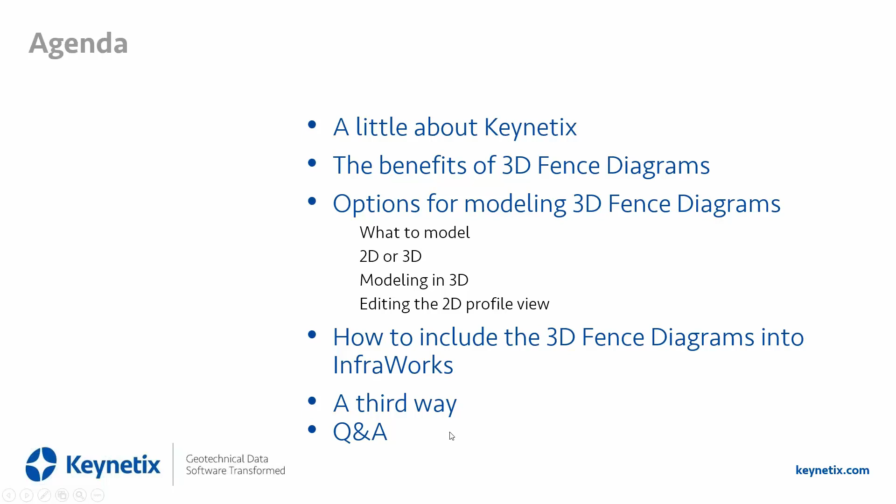We're going to look at ways to do it in 2D, in 3D, how we can then bring them into InfraWorks. We're going to have a quick look at a third way. This is one of those futures disclaimer items, but this is what Keynetix is working on. And we'll obviously, as we go through this, answer any questions that you may have.

So Keynetix, I'll go through this very quickly as Dave's done it all before, but primarily we develop software for geotechnical data management. So if you need to generate a borehole log, generate a cross-section, a fence diagram, that's what we develop our software for, and it works very closely with AutoCAD Civil. We work very closely with Autodesk, so we have lots of experience in this area. So without any more of that, let's just move straight on now.

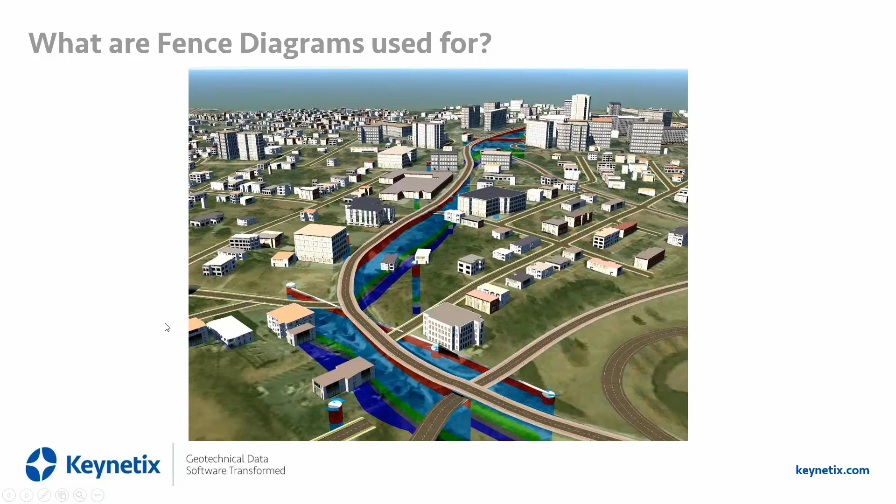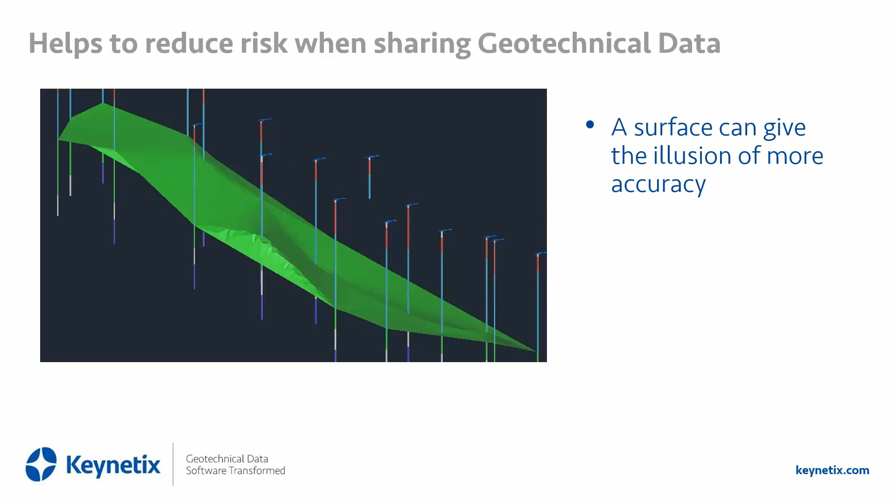Well, if you share a nice shiny geology surface like we've got on screen here, it's nice and shiny, computer generated, it must be right. But in reality, that's not the way geotechnical professionals work. What they will do is they'll create a whole series of cross-sections across the site, and they will study these cross-sections looking at what geology is going on in 2D.

So if you've got a point on the surface that is a long way away from where they studied, though we may have a very smooth, very accurate looking civil surface being generated, in reality, this point here may be nothing at all like what you're seeing here. So you may be able to measure it down to 0.0001 of an inch, but actually it could be out by meters or feet. That geology may not even be there. These cross-sections will be what the geotechnical professional is looking at and studying. So by sharing these cross-sections, they are more confident of reducing the risk.

Now, of course, if it's important, you need to know what's going on at this particular point here, then you need to ask your geotech to create a cross-section and study what's going on in that particular place. So these are some of the benefits of sharing these cross-sections, as well as being visually a lot more user-friendly and easy to understand.

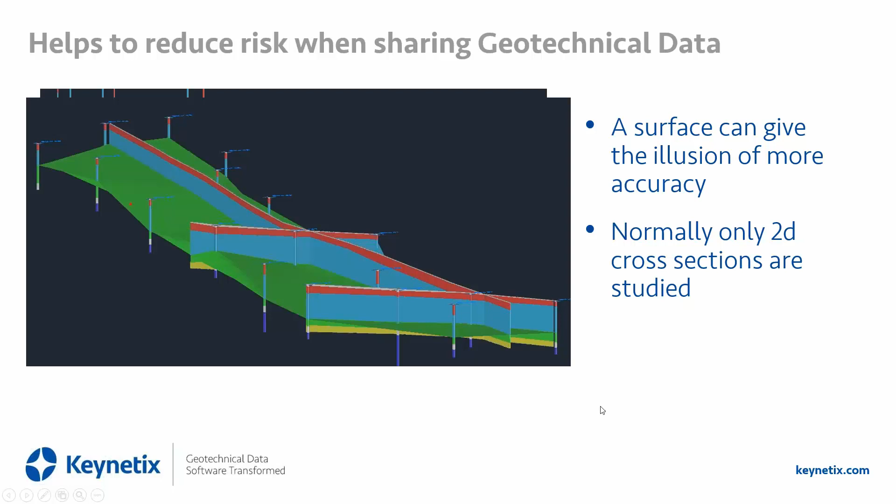Now, we're going to go in and start looking at the various options for modeling these fence diagrams. But before I do so, I'm not sure at the moment how many people are using the geotechnical module, but when you start receiving or generating geotechnical data, there's quite often a lot of different terms used. So for instance, in the geotechnical module, you can tell it to model using geology codes, legend codes, geology code 2. If you're working in the US, you may want to use soil classification codes, lithology, geology formation, lots of different terms. But actually, what data do you need to actually model on?

Well, actually, it splits into really two camps. Things that describe the lithology or the formations. These are basically describing the physical appearance of the material that you're looking at. So in the UK, we generally call these legend codes. In the US, it could be your Unified Soil Classification System. And it's basically looking at the breakdown, the percentage of how big the particles are. Is it sand? Is it gravel? What's the makeup and percentages of it? It's really describing what the drillers and engineers on site have found as they dug the ground out.

That information, though, is normally interpreted to look at the actual engineering characteristics of that soil, what's common, and given a geology code, as we call it in the UK. In the US, we found some organizations call it the engineering soil unit, and it's basically common types of characteristics or properties with a mass of soil combined together.

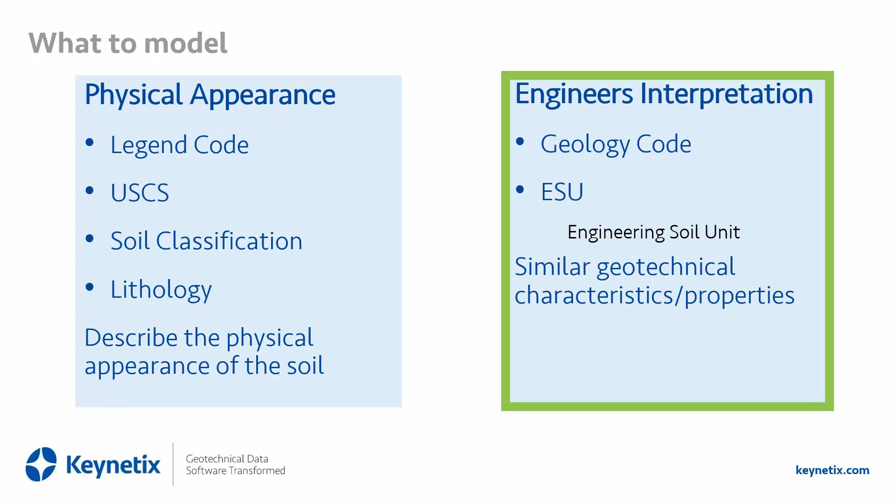Now the reason I'm saying this and emphasizing it is if we actually go and look at two typical log strips, the one on the left is based on physical appearance, in this case it's the soil classification, while the one on the right is based on the engineer's interpretation. If you see, as we go down this hole, we've got some clay. We then got clay with some silt in it. We're then back to clay again, then gravel, then some more gravel underneath that.

But actually, in reality, for engineering purposes, we don't need all this complexity. And all this extra complexity is incredibly hard to model. So the engineer will look at that and they'll actually say, well, let's combine all this information into one big formation called clay. Let's call it gravel. Now the person who looks at this needs to have the engineering professional experience to look at this data and work out how does it combine.

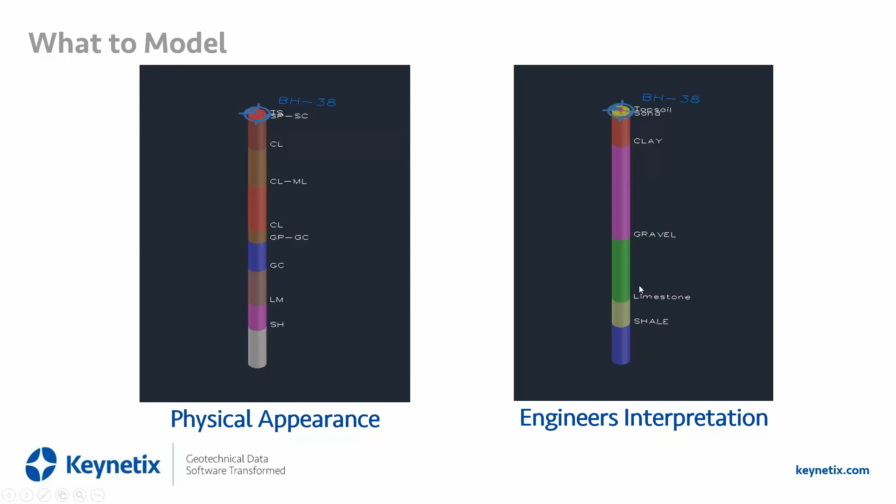They'll be doing this also with lab results coming in, moisture contents, a whole host of other information while they interpret this data and look at it. But the reason I'm saying is that this is the information we ought to be modeled on, and that's the information you need to be getting or generating yourself to work with inside the geotechnical module.

This then leads me to my next question, which if Eric can just show it, which is basically asking you who does your engineering unit interpretation. So basically, do you, when you receive the data, you or your team actually look at it and work out the interpretation, how it's going to be used? Is that information just passed through to you?

At the moment, and I've seen it quite often with some customers, they don't actually model at all on any of the geology. They just use the actual lithology codes in cross sections and that's it and nothing else. And of course, if you're unsure, then just put I don't know. I'll leave it open for just a few more seconds. We've got about 70% voted. And let's go ahead and close it there. And I'll share the results so everyone can see them.

Okay, that's good. So looking at it, 35% of the team do it themselves, 31% have it supplied, and the others either don't know or we don't model. Actually, I'm pleased to hear that. So that means, good 65, 2/3 of you are actually aware that you need to be working with geotechnical data and you're pulling that geotechnical information in to work with. That's good to know. Right, let's move on to the next one.

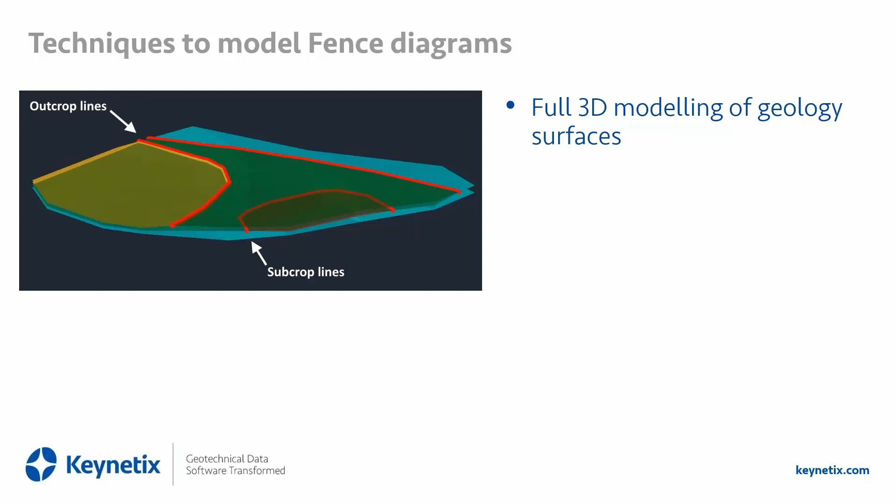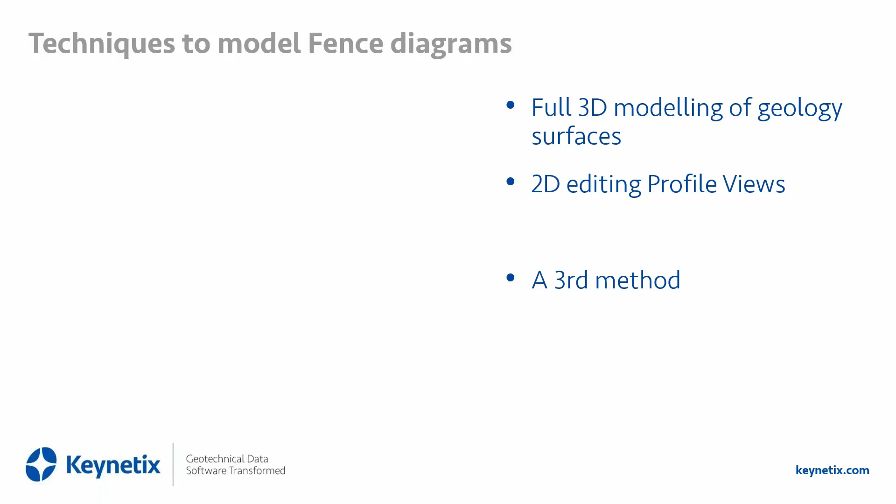So where were we? So what we're going to do now is, thanks to that information, let's start looking at the techniques now to actually model these fence diagrams. So the first one we're going to look at is actually the full 3D modeling. So this is actually crafting, sculpting your surfaces to represent the geology. We're then going to go and look at, well, how can we create them by just doing simple 2D edits in the profile view. There is actually a third way, which we hopefully get time at the end to cover, or potentially a third way for the future we want to show you.

So before we start doing that, let's start looking at the pros and cons of whether we want to model in full 3D or whether we're going to use just 2D edits. So if we look at the pros for the full 3D modeling, it gives the engineers, the geotechs who are pulling the data in, potentially a better understanding of the subsurface. They have to look at it all around in different ways and understand how to actually manipulate their data. Once you have actually done the modeling, it then generates dynamic profile views.

You make full use of the functionality in Civil, put a new alignment in, create a new profile. You've got the geology already modeled, it pulls it up, it makes it very quick. And of course, you've got a 3D model, then you can start generating volumes from it. You can use it for many other purposes. However,

workflows are complex. I'm not sure whether actually the workflow itself is complex, but actually learning how to apply it can be quite complex. I guess it's a bit like learning to paint. Painting is quite easy, but actually learning how to paint and put the brush strokes in the right place takes a bit of skill and time to actually learn how to do it.

And I guess it's the same thing with what you're going to be seeing here with doing the 3D modeling. You may need more data. If you had only a site with one borehole on, you can be as creative as you like in doing the modeling around that one borehole, but it actually isn't going to be any reflection, or it's going to be incredibly lucky if you actually get it to reflect what's going on there, because you only got one piece of information. So you may need more boreholes, you may need more thorough data to actually do a more accurate model with it.

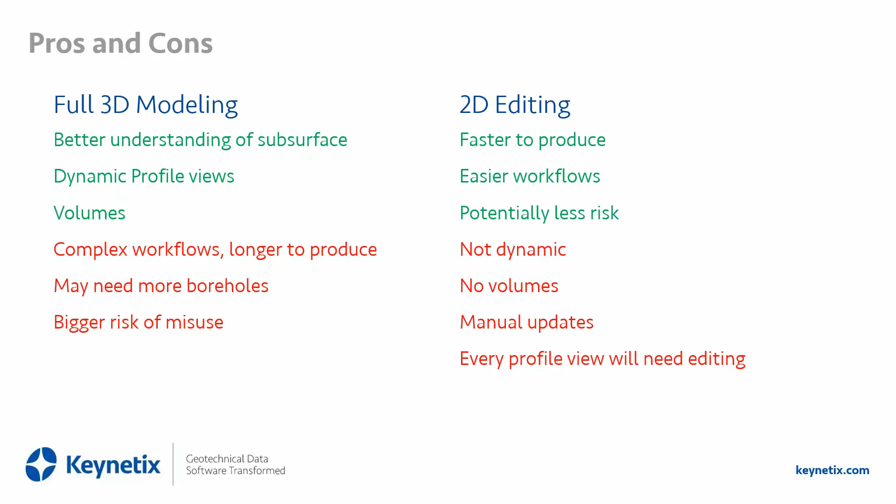So yeah, there's pros and cons with the two. In reality, I think generating full 3D models is the better approach, but it takes longer. 2D quite often is the quick answer to solve the problem. So let's go in and start looking at the steps involved in doing this 3D modeling.

It's actually relatively straightforward. You draw a polyline in plan where you think the extent of a particular geology type is. You convert it into a feature line and you make sure you then assign it an appropriate elevation so the Z values are correct. We then add that feature line as a break line to the appropriate surfaces, and if we need to, we can also add hide and show boundaries to show where that geology occurs across the site. It's pretty straightforward. In fact, this first stage, 2 stages, this is the way I tend to like doing it. If you are a dab hand at drawing 3D feature lines directly in the right place, use any technique you want to draw those feature lines. I tend to use this technique myself.

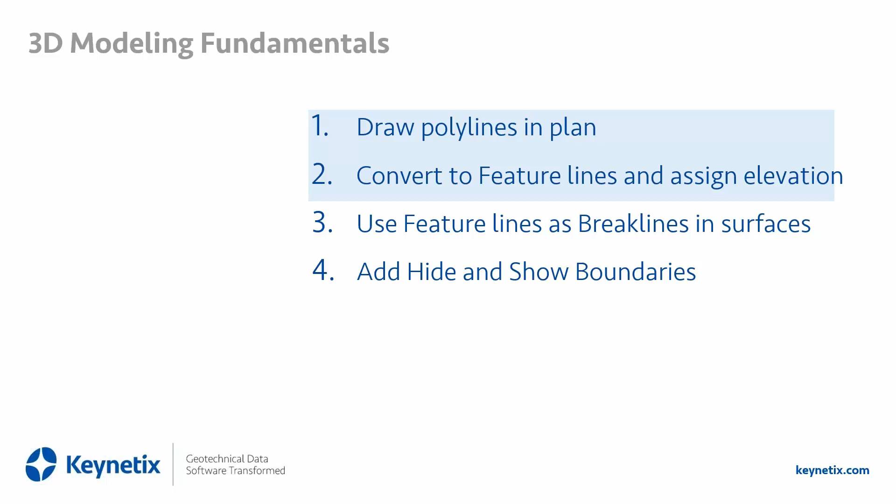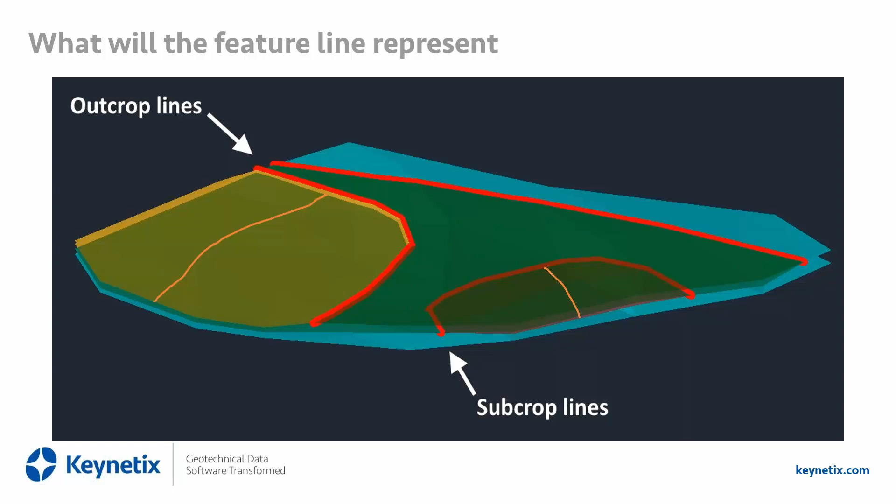So what do these feature lines actually represent? So here we've got a little example of some different strata, and we've got this material coming up over here, let's call it clay, and it stops here. So what we can do is draw a feature line where we think the extent of this particular clay is. So as it comes over, across the whole site, you can see coming across is the green, and we think this is the extent. So we're drawing a feature line that is going to be in the right XY and in the right Z value across the site. Now, generally speaking, they don't have to be at the extent of the geology. You could actually draw the feature line wherever you want to, if you want to sculpt and manipulate your geology surfaces into another position. And these are basically the techniques that we use everywhere.

When you're doing this, it is important you understand the order of your strata. What's going on in the area I'm looking at? Is it sand, clay, gravel? Is it gravel, sand, clay? Is it some other material? Understanding your geology makeup, the order that you're looking at in your particular area, understanding this information is really important when you're doing this. And you'll see that as we go further through this presentation.

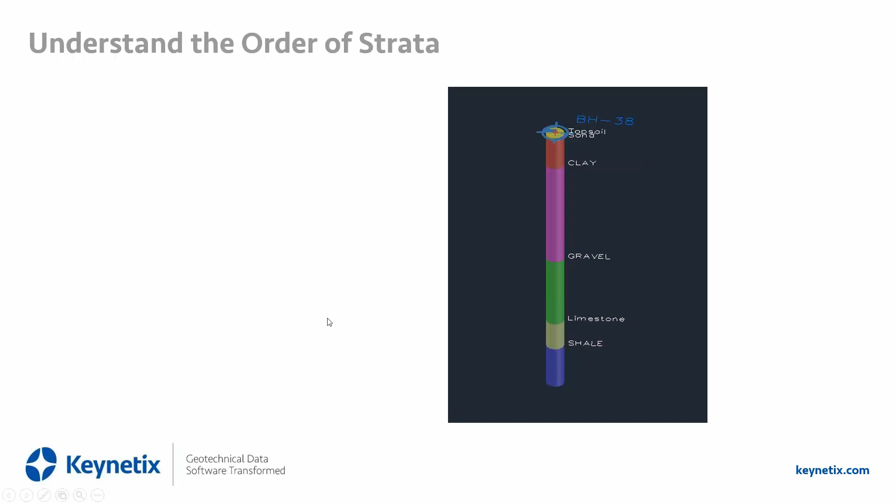There's a few do's and don'ts. So feature lines should not cross different geologies. So here, for instance, the red geology up here, which is our clay. Now, most of the people on this are seasoned Civil 3D users.

So if we create one continuous feature line all the way down here, then add it as a break line to this surface, we know that this surface is going to suddenly extend all the way across here. Well, we don't want that to happen. So what we need to do is to draw individual feature lines that have a similar common geology above and below. Once one of those geologies changes, you need to start to create another feature line.

Also, don't overhang it. Well, you can overhang it. If you do, though, you just need to make sure you move the Z value at the end of it to the right Z value. Otherwise, you'll suddenly have a great big cliff at the end of your site where your geology just disappears down to the middle of nowhere. So it's always best to snap and make sure you don't have overhangs. But these feature lines should only be drawn for when you've got common geologies above and below. As soon as one of those changes, start a new feature line.

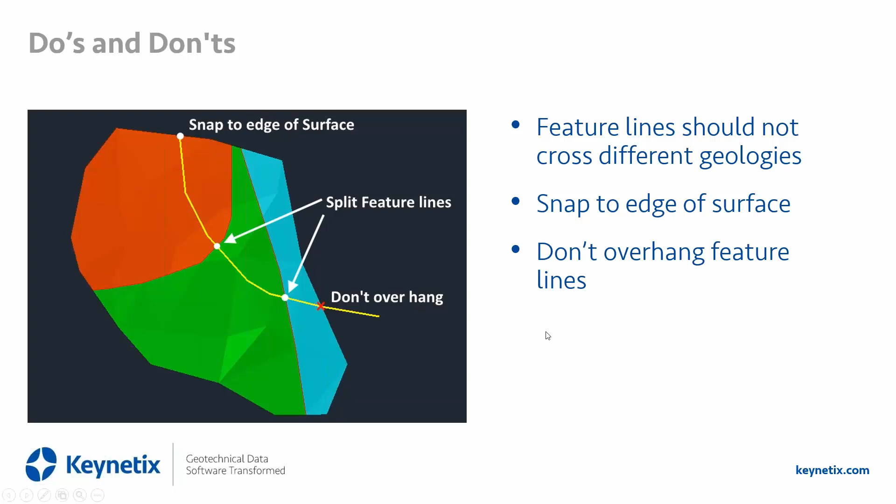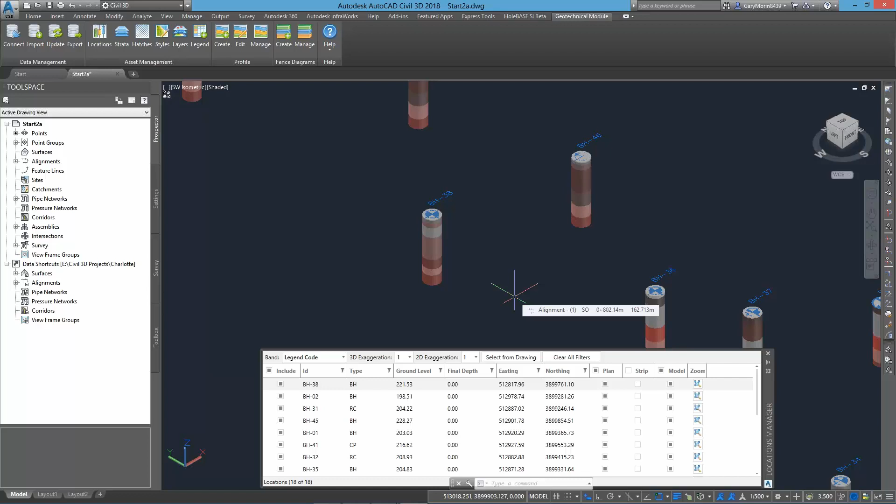You could try modeling it on this data, but it's going to be a magnitude more difficult because there's a lot more variation in there. So generally speaking, you want to show the geology codes. In your log strips, when you generate your profile views later on, you may well want to show your legends or soil classifications, but the actual modeling should be done on the interpreted engineer's data instead.

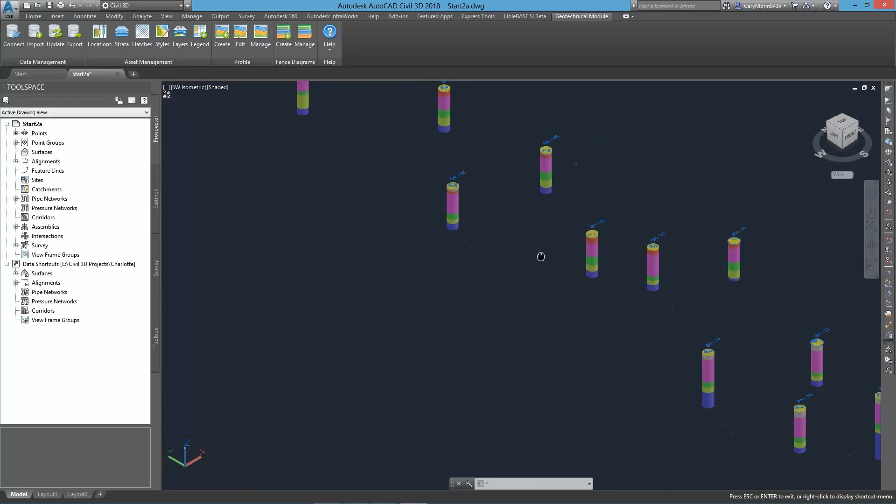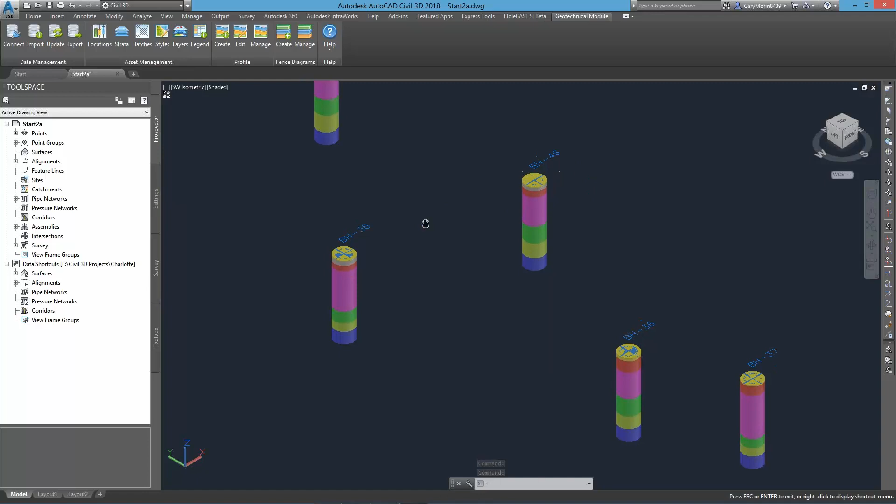So now we've done that, let's have a quick look and try to find out what's going on across our site. You can see down this bottom end of my site, all these boreholes have this white towards the top. This is my peat, and it comes along and it stops here. But then we have a whole series of red, where our sand starts. Sand again, here we've got peat and sand. Now our peat's gone completely.

One other thing I've noticed here is we've got the green, which in this case is gravel on these 5 boreholes. They go all the way down the site, but they're not at the top end of the site. So it's looking at the data, trying to understand what's going on across the site. And this is where I should be using as much material as I possibly can: maps, background, photographs, a whole host of different information to give me the best picture of what could be going on here.

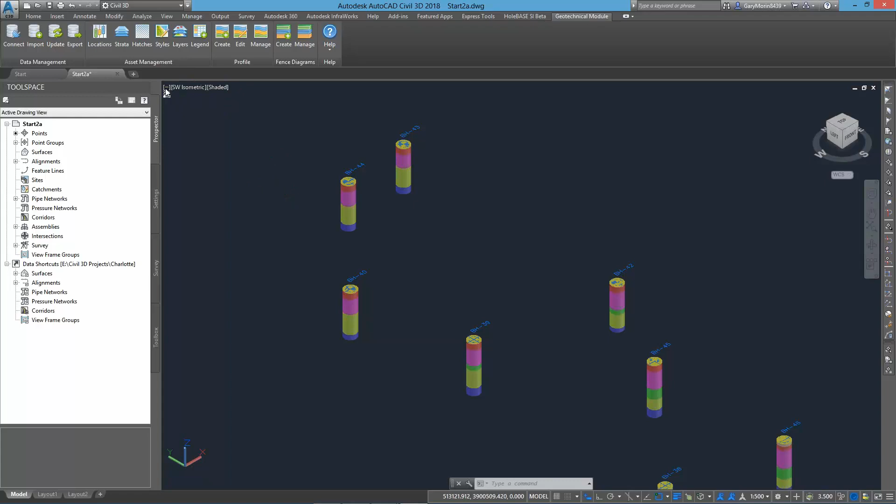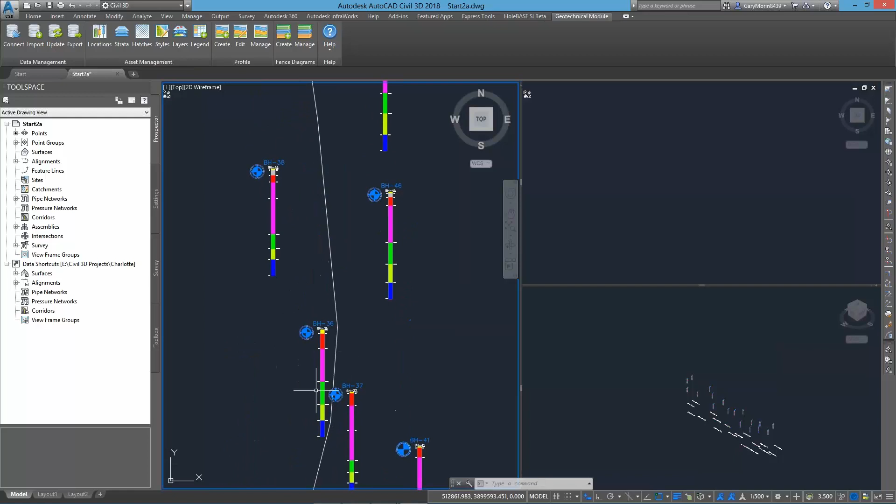Another way to see this information is for us to go over to plan. If I go to the location manager, I can also tell it to show log strips on plan. In fact, let me just make these slightly bigger. Let's bring them up to 2 times the size. There we go. And again, you can see here, there's my boreholes with peat in. The peat disappears. Peat, we are going up here again. So you've got this information to give us a good idea of what's going on.

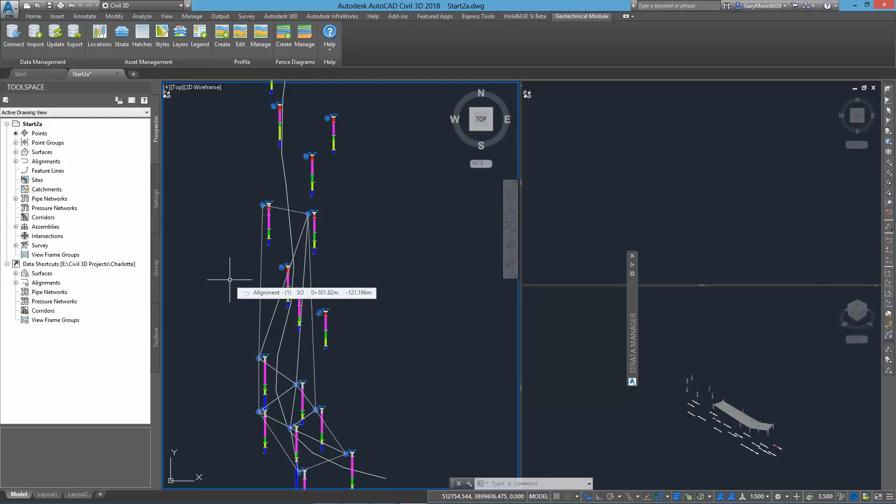So let's start bringing in the geology surfaces. In fact, I'm going to bring in the peat first of all, just to quickly show you some of the stuff we're going to have to do if we just left it like this. Can you see it's joined all the dots together where we have peat all the way up to here, and our surface continues right through these boreholes where we don't have any peat. So that's what we're going to have to create and model and make it look right in a little bit.

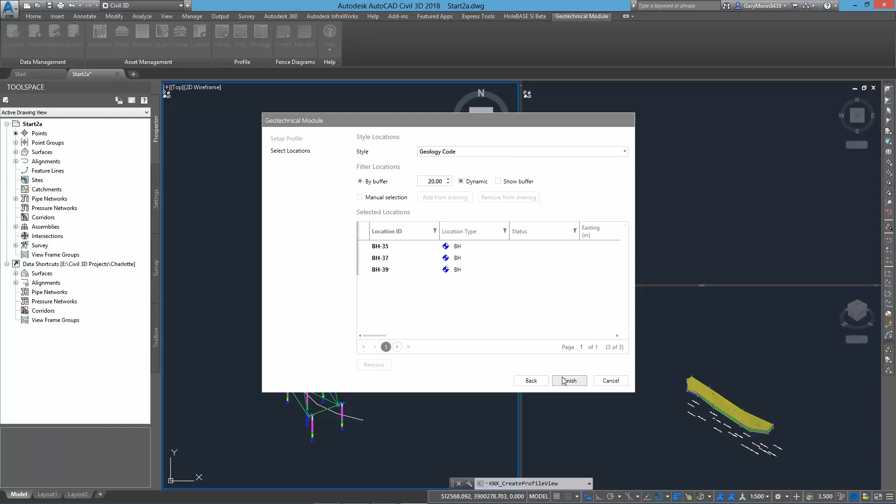So again, let's create all these other surfaces. So it does that by just clicking. And with that done, I'm going to go through here now and tell it to create a geotechnical profile view. I'm going to tell it to use my profile view style, tell it to just use stations, and we'll use all the default settings. We'll, for now, just display geology codes in my strips as well, and we'll put it over here.

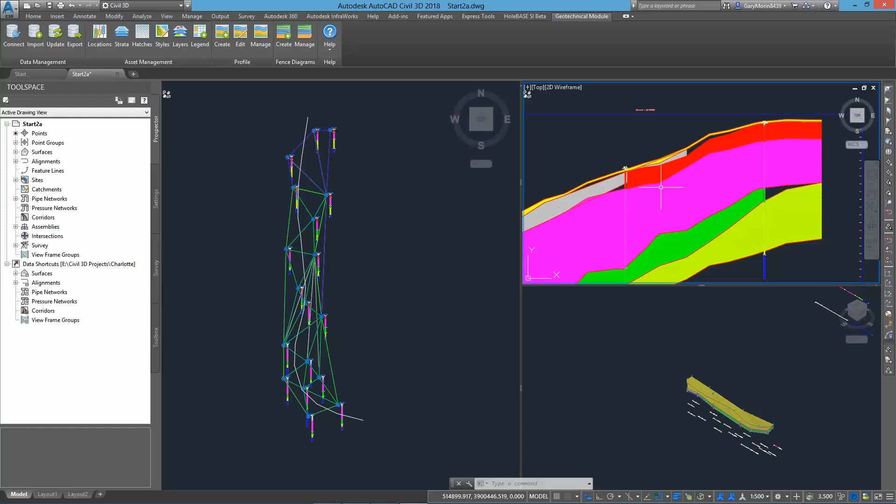So if we now look at the automatically generated one, you can see now where we have the problems. We have the peat coming right the way across the site, then ending up here somewhere. This particular borehole here has no peat in it at all. You can see it passing straight the way through. It looks a bit of a mess and it needs correcting. So let's go in now and look at these techniques to do that.

So what we're going to do is zoom in here and work out where we think the extents are for my peat. We'll start off with the peat first of all. Now, just to save a little bit of time, I've actually created the lines already. So what I've done here is I've drawn some lines across where I think the extents of my peat is in the boreholes that we have in the middle. And also down here we've got two lines here. I'm just going to quickly flip back to my presentation.

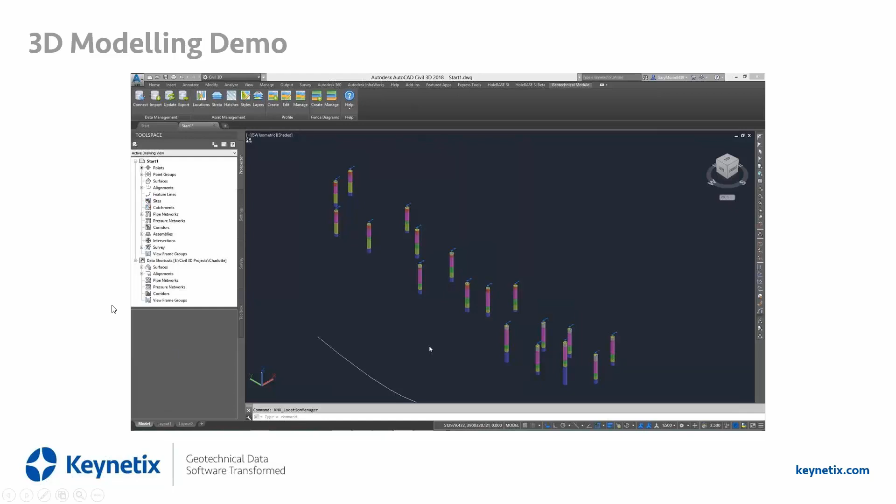So what I'm going to do when I go back into my drawing here, just to save a little bit of time, I can process that line and that line, which are at the moment just 2D polylines. You can see them there floating in space. I'm going to convert them into feature lines. But when I convert them into feature lines, first of all, I'm going to say don't put them on any site. That's really useful for the geotechnical module. I'm going to say don't use sites.

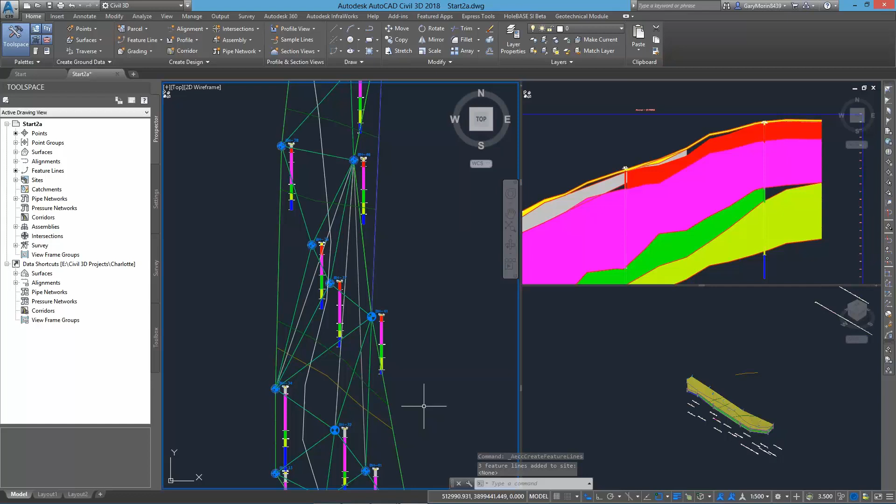But I'm going to tell it to assign an elevation. We'll click on assign an elevation. And if you remember, our peat sits underneath my topsoil. So I'm going to say use the same elevation for my feature lines as the base of the topsoil surface. And now it's just moved it down. You can just see it disappear down here now on our 3D here. So with those done, I just pick those three again.

And we do that by just clicking our lines and going to add to surface as break line. This is a little bit tedious, but all I'm going to do now is pick topsoil base and hit OK. We're just going to create it as the standard break line and hit OK there as well. And each time we do this, you'll just see our profile slowly manipulating. So now I'm going to come here and say, well, let's do it to my peat top.

In fact, here you can see suddenly all my peat has modified the surface to match my feature lines here. Can't see too much yet in my profile, but you will do on the next one. I'll also do the same to my peat base as well. And once we tell it to do it for my peat base, can you see now suddenly I've got my little lens of peat up here. I've got my other peat coming down here.

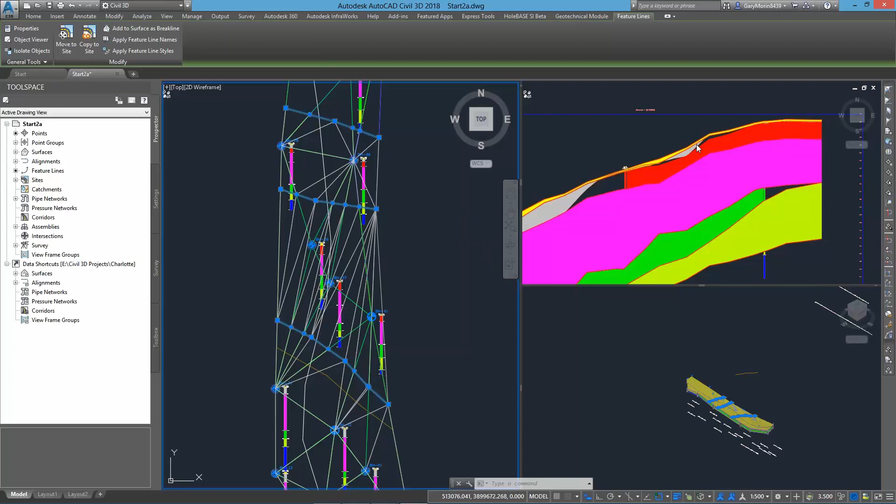So that's almost done. The only thing I've got to do still is pull my sand below up to the same point. So we just go in here and go the one below, which is sand top, and we pull that up as well. Okay, so that's the general principles of how you model this geology. I'm going to do it again, but this time for this one here. Now, this is where the sand comes along and ends up going below my peat here. So what I'm going to do here now is go through the same process again.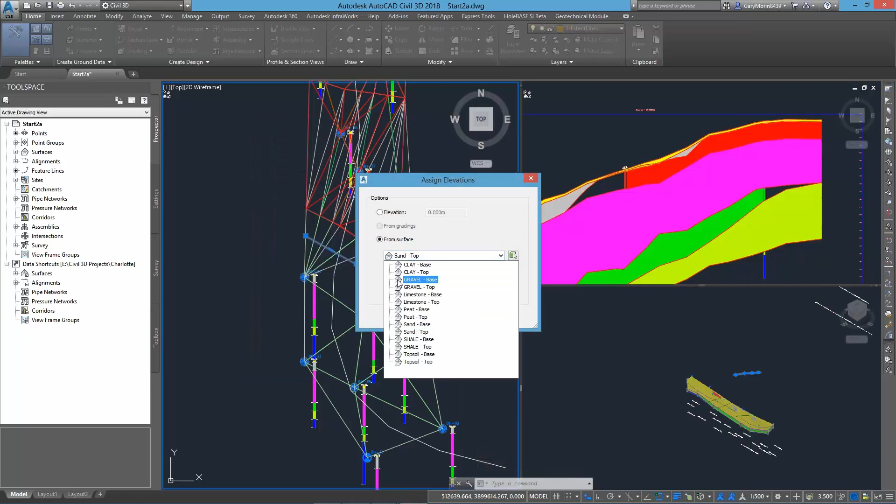Feature line, create from object. I'm going to come through here and tell it, in this case, that line sits underneath my peat base. Okay, and we'll do that. We select it and we go through the same process again. So it's going to be on the peat base. And just to double check this, we'll go back in here again. So this is this line here. So it's sat underneath my peat base. We're working and manipulating the sand. So it's going to be the sand top and the sand base. And it's sat on my clay, so it's going to be the clay top as well.

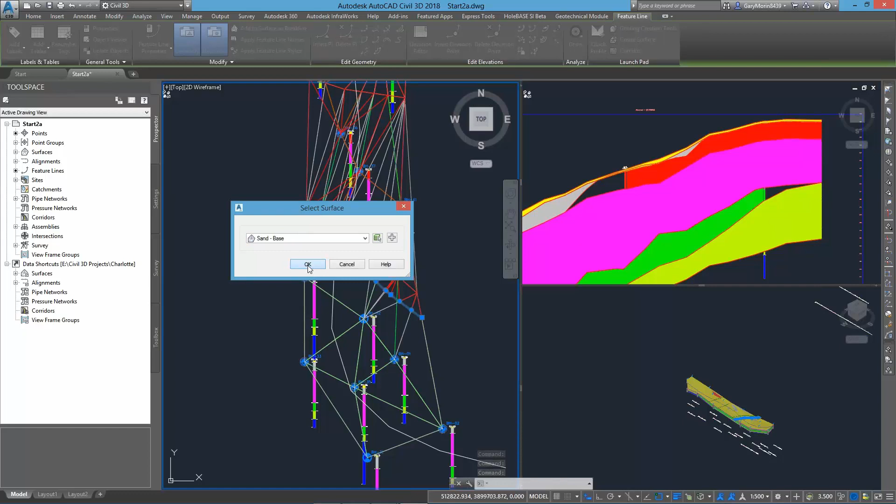So we come through here and, I think I just did a peat base. It will tell me. I thought I had. So we'll go through. Oh, it's now going to be sand top. That's the surface. And you'll see again, as I click the next one, sand base, the profile suddenly updates again. There we go. Just to finish it off, we have to do the surface below, which is, in this case, our clay top. So we're almost there. You can see they've all been pulled in correctly.

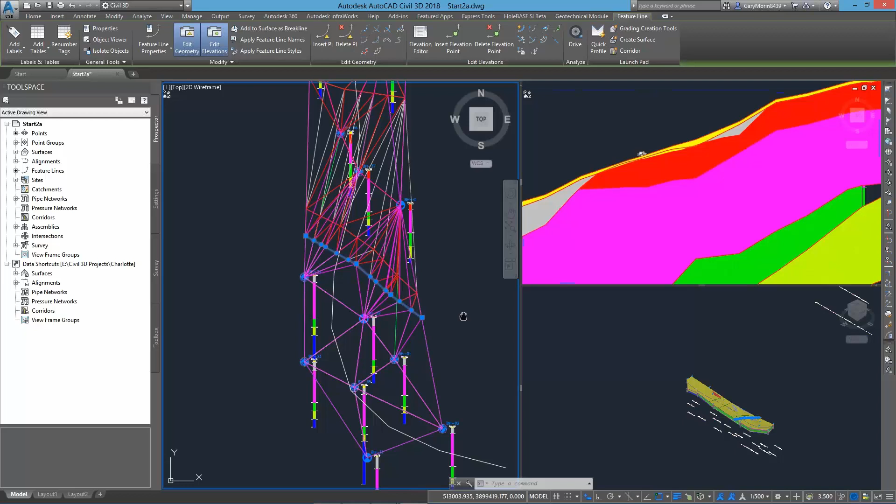The problem we have got, and we'll zoom in here slightly closer, you can see this line in the red moving over, and probably you can see here as well. In fact, you can see it even better if I just go and turn some strata off. Let's just turn off all my other strata and just leave the peat on. Can you see how the peat is completely going across the whole site, even though it's not in these boreholes here? So what we're going to do is just clean this up now.

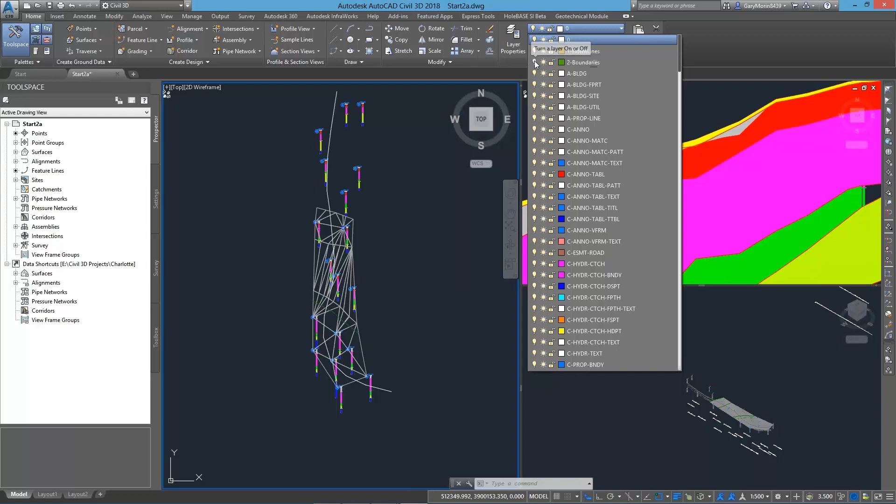Now the way in which I generally do this is by using boundaries. So again, here's one I've done before, at least some boundaries I've drawn. Now in this particular case, there's only 2 zones of it. So I don't necessarily have to do it the way I'm going to do it here. You could just delete these line edges here very quickly and job done. But if you ever update or change the data, they will suddenly appear again. So using boundaries is the better way of doing it. But this technique I'm going to show you is going to look a little bit back to front.

I'm going to select my surface. Okay, make sure nothing else is selected. Let's do that again. Select my surface. I'm going to go to add data, hit boundary. But the technique I like to use, especially when I've got multiple lenses of a particular substance, is come in here and tell it to hide and pick an outer boundary. Pick this encasing boundary here and hide the whole of that geology.

And then what I do is go add boundary, and this time do a show boundary. Then just pick the elements I actually want to be exposed and show. And there you see my 2 sections of peat being shown through. Now I actually have to repeat that process if we go back into the strata manager for the base strata for my peat as well.

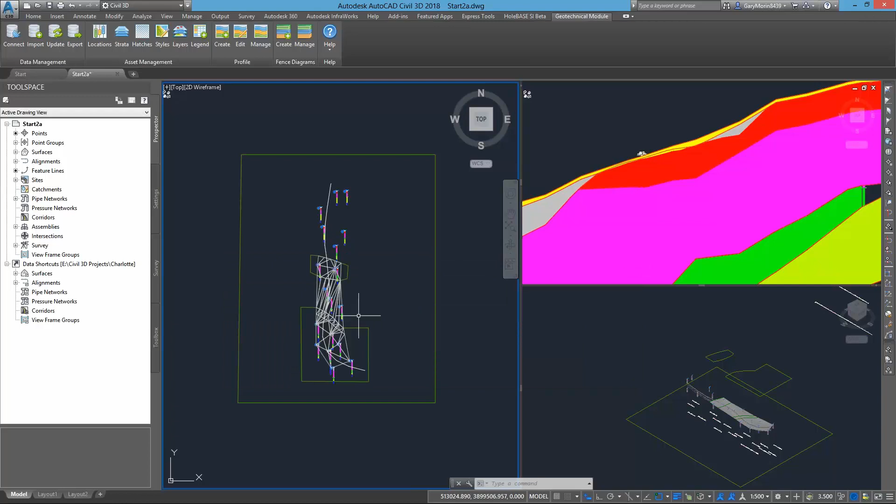So we click on this little icon here. I can tell it to turn on my base, turn off my top. So now we've got the base, and we just go through that same process again. We just pick it, go to add boundary, we'll tell it to be a hide boundary, hit OK, pick this boundary here. One more time, boundary, show boundary, and pick these 2.

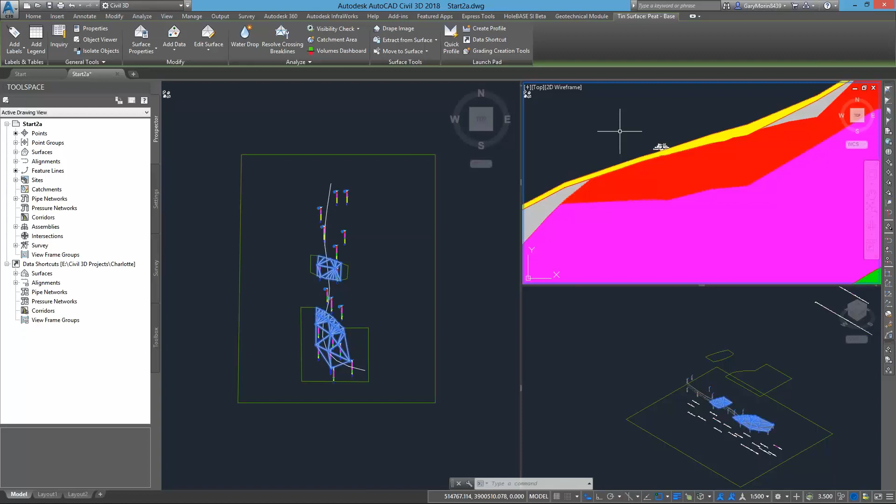Okay, so we now got the top and base being pulled through, and hopefully you can see over here now how that's all been cleaned up. Nothing's showing here. So we really are ready now to work with this data. Now because we've been working on the whole of the model, the whole surface, what we can do is put some checking cross-sections in really quickly.

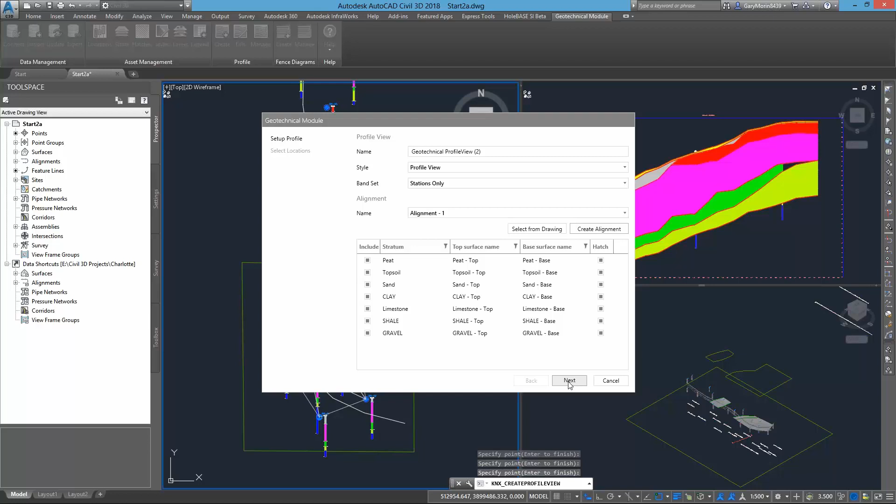So if I go back to the Geotechnical Module now and tell it to create a new profile view for me, I'm just going to do a really simple one. Let's first of all just tell it to use profile view, tell it to use my stations only, create an alignment, and we'll just do a real simple one just going through my site over here. Hit next, geology code, and let's put that over here somewhere.

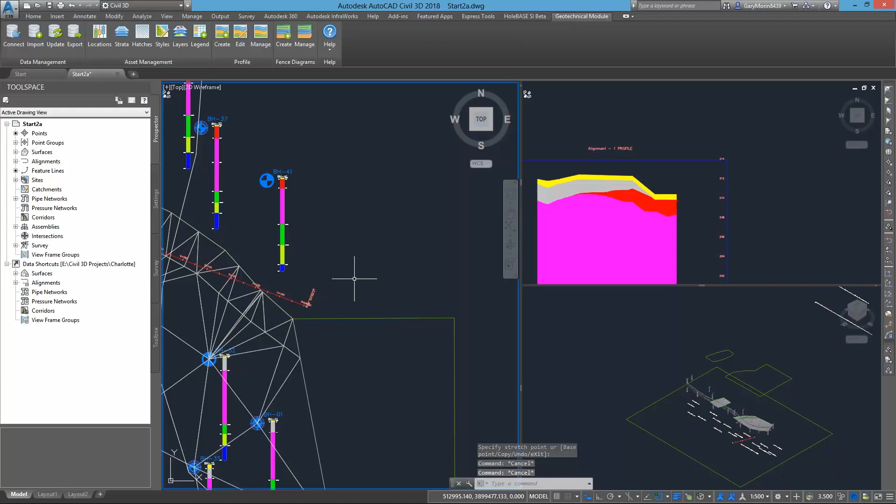Okay, so what we've seen here, can you see that's all joining up, all butt edging where the peat stops and the sand starts. And because we're using Civil and we've fully created a 3D model, if we move that to a new location, it all updates for us as well. So that's one of the big beauties of using full 3D modeling.

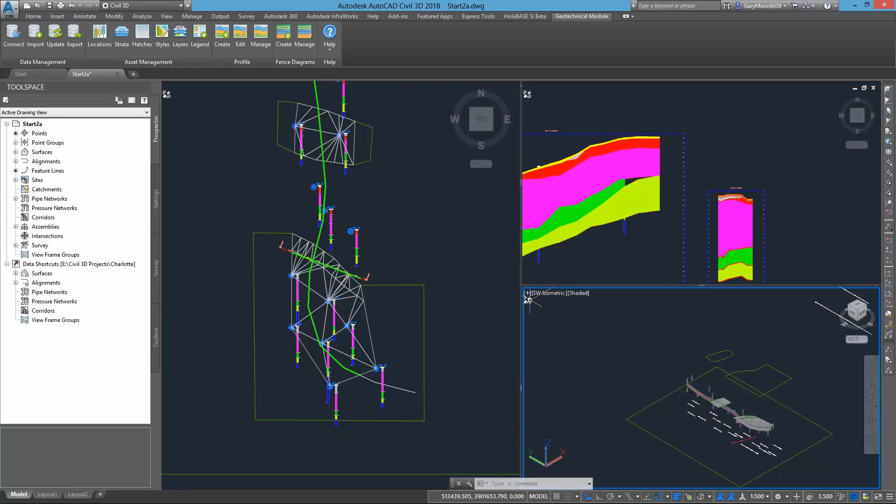Now with this all done, I can now go to my create fence diagram command, the whole reason for doing this in the first place. Come down here, select my two profile views I want to use on my fence diagram and go create. We'll just give it a second to go through creating it. I'll just make this view here, maximize it, zoom in a little bit closer there.

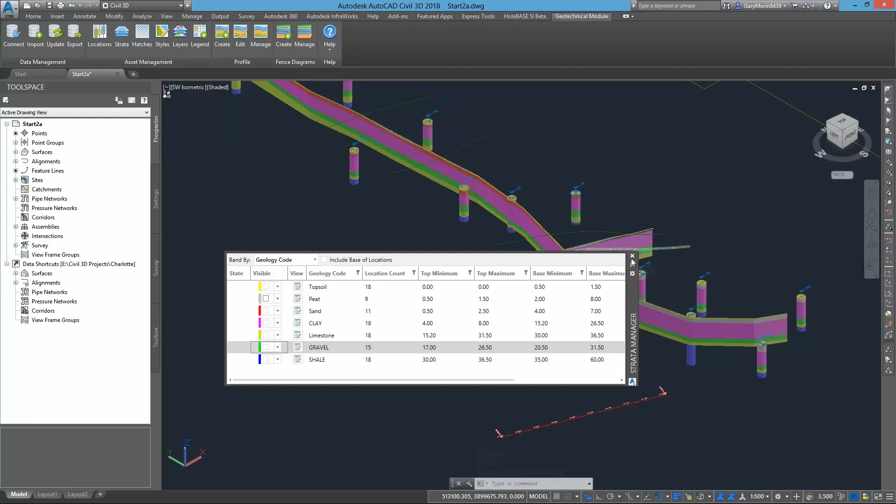But let me just come through here and just turn off a few bits so we can see it a little bit clearer. Turn off those log strips, shall we? Turn off the peat at the top. There we go. So now you can see, if we zoom in here, how we've got that sand dying away, the peat coming up over here across the site, being pulled through. So that's really the first major technique for modeling the 3D geology.

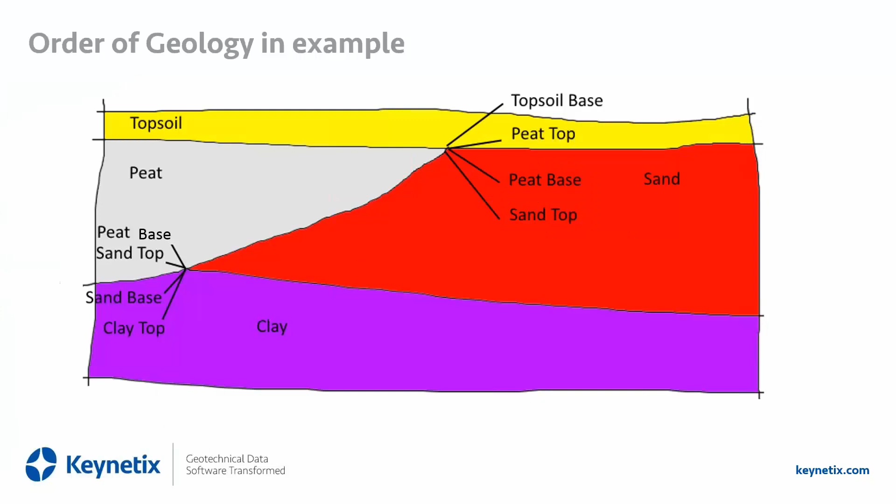Just checking how we're doing time-wise. Right, let's go back in here and crack on with this.

Let's look at the 2D editing techniques now. So fundamentals of the 2D editing: primarily we're going to have to work with the geotechnical profile view. And what we have to do is change the surface profiles away from being dynamic to static. And then once they are static, we can actually edit the layout of those profiles.

Now this is quite an important thing you've got to remember here, that once we change it to static, it's lost its relationship to that surface. So if that surface changes at all, you won't see those changes come through into your profiles anymore. So once you do this, the intelligence, the dynamicness, has completely been severed between the two.

Now, even though this is a simpler process, when you've got 20, 30 profile lines going across your screen, it can still get confusing. So what I found is the best thing you can do is try to hide things and make the drawing as simple as possible. Hide grids, remove hatching from your profile views, use custom profile styles to highlight what you're editing.

You'll see this all now in the demo, but try to make it as simple and obvious what you're doing as you possibly can. When you've got loads and loads of lines, it's so easy to make mistakes. So we go back into this example here. What we're going to concentrate on in this particular case is finishing off this little model tweak that we have up here. So what we're going to do here now is, let me just select this particular profile.

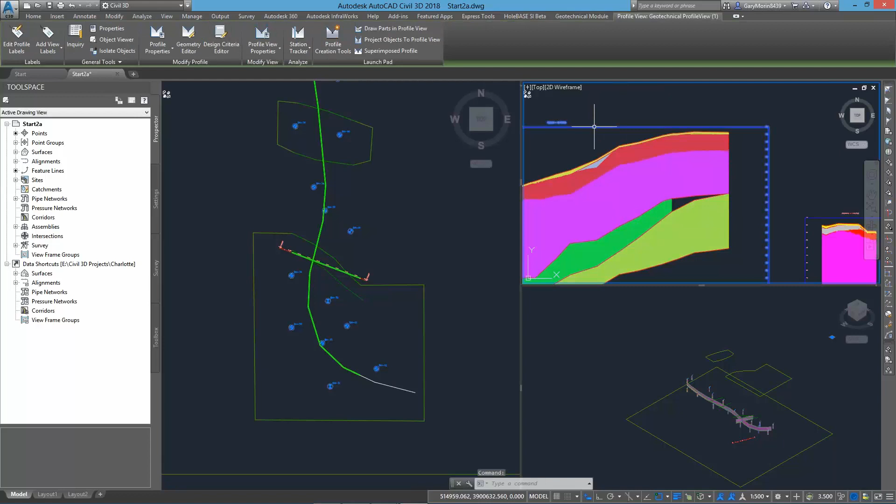I'm going to go down to profile view properties, and the first thing I'm going to do is tell it to turn off my profile hatching so I can see my lines a little bit more clearly. Now we're on there, I could just get working with it how it all is. But what I'm going to do first of all is just go in and quickly change the actual styles being shown. And you'll see what will happen as I do this.

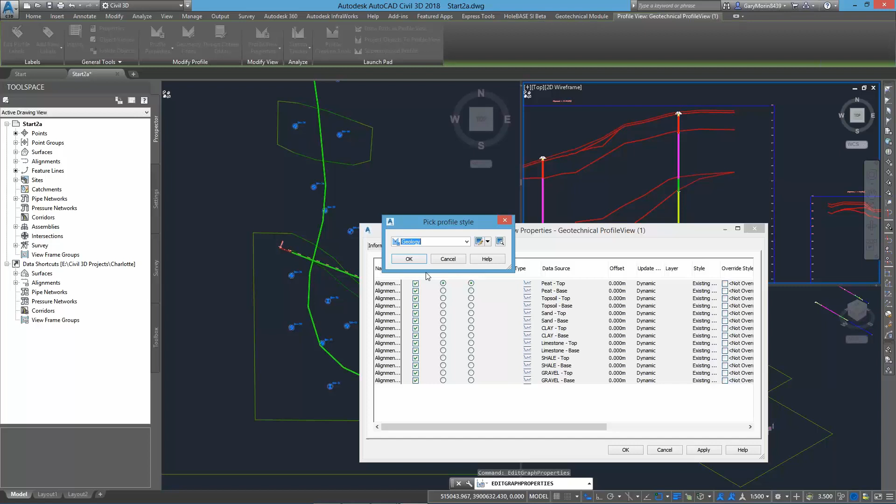So I'm going to go across, select a style. I'm actually going to tell it to use this geology custom style that I've created for this webinar. Now this is not rocket science stuff here. We click on that style, and all I've done is told it to put a little black square, just a simple square, where we have any vertical intersections across our profile. And what that means is, we finish this off and hit OK, we have lots of little dots appearing across my drawing. So basically what we're going to be doing is joining dot to dot as we put this information together. The next thing we need to do is change my profile into static so I can edit it.

Now, picking them off the screen can be dangerous. What I recommend you do is go to your tool space, go down, find the actual alignment you're working with, go down to the profiles and select them from here so you know which ones you're clicking and which ones you're editing. So in this case, I'm working on my gravel. So I'm going to go down to my gravel top, make sure I pick it and click on properties there. And we come across and see this update mode. It's dynamic. We're going to switch that to static. So it means it can now be edited, but of course it won't be updated from your surface anymore.

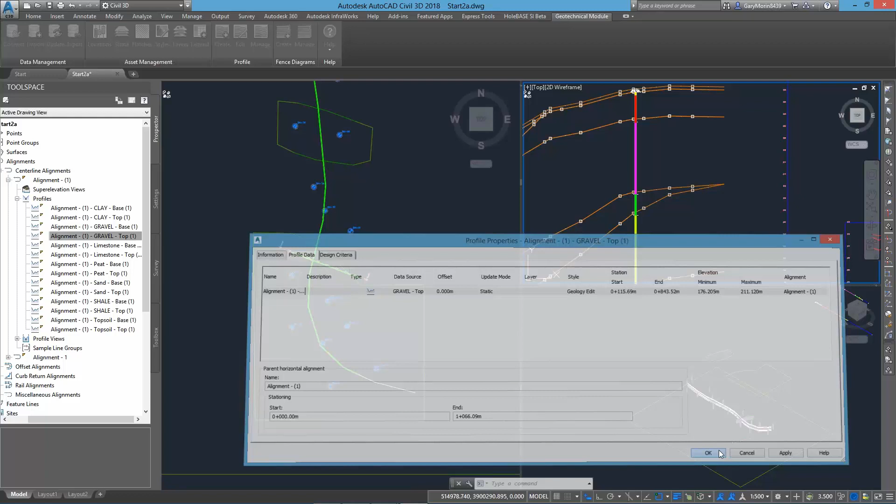And just to make it a little bit more obvious what I'm working on, I'm going to use this particular style I've created called Geology Edit, and all that does is make it bold so I can easily see the line. So that's the top of my gravel at the moment. So I'm just going to come in here, pick that line, tell it I want to edit it, and the next things are really straightforward. You've got this dialog box here. I can see it's gravel top I've got selected. It's all highlighted. So I'm going to use this button here called Insert PVI. We come across here and say, well, my gravel probably comes across to about this point here. Hit Escape, and that's it done for the top of my gravel.

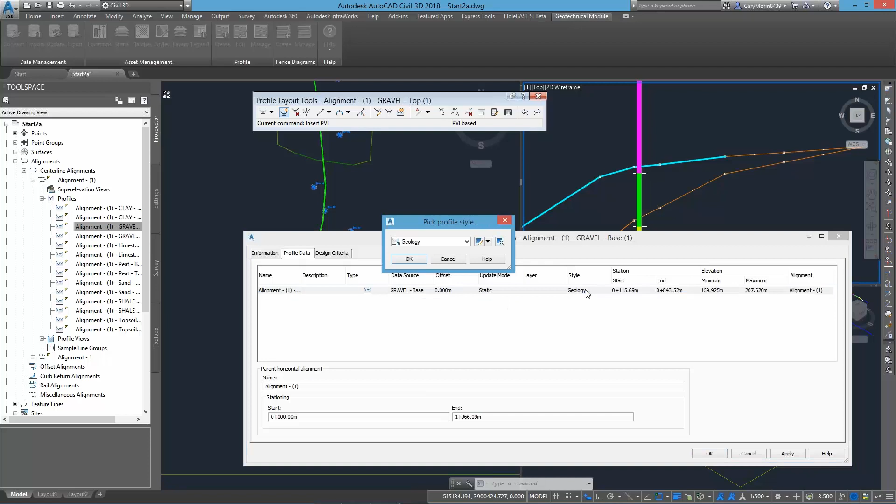I'm going to repeat the same process now for the base of my gravel. So we come in here, we make it static again, come across to Geology style, and make that Geology Edit as well. Hit OK here, so you can see that line coming and stopping just down here. Now notice here it's saying top, so I'm going to just click on it, and now it's switched over and we're working on base now. We're going to make sure we're in the right thing, and insert some more points. Let's do that one there. Let's move that a little bit away from there, like so.

Okay. So we're almost done, but if you think about it, if I left it like that, we'd have a little void appear just around this area here. So we've just got to do one more to edit. Now again, I know this is limestone, so we could just do it this way. I think I'm just going to make sure I go through the right principles again.

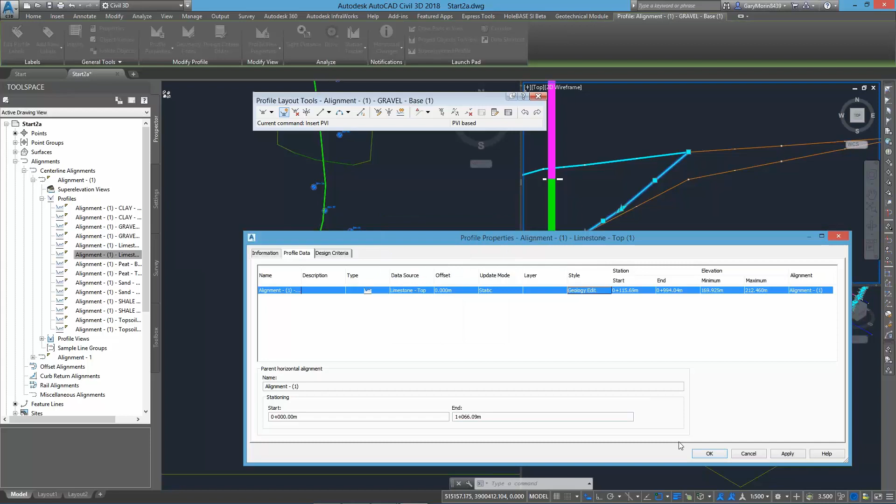So we'll just do this one. This is the last one we're going to do. So again, static, Geology Edit, just so I can see, we'll make sure I've picked the right one. Yep, there we go. And again, let's just pick on it so that becomes active. And all I'm going to do now is just pull that so it fits. All I'm doing is joining these dots together as such.

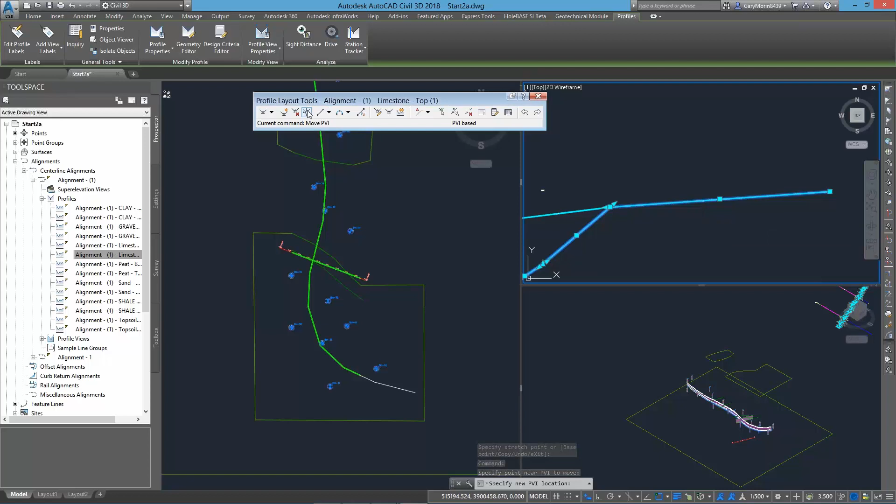And I'm just going to insert a new point. This one here is insert a point, which is just there as well. So that is it done. So I'm hoping now, if I hit escape, just scroll out there a little bit. Let's go back to my properties again. Let's turn on my hatched areas again. So you can see now how that gravel all comes up and joins it correctly.

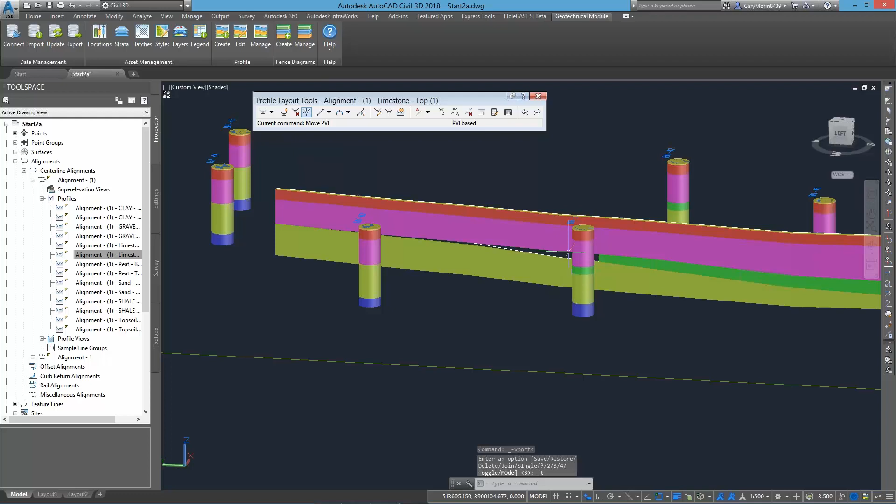And if I'm right in doing this, if we maximize my viewport, let's just zoom in here again. You won't see these changes straight away, but if I go to manage and tell it to rebuild my cross section, can you see it's using those edits in the profile view directly in there? But of course, if I move my alignment now and tell it to rebuild, it will go all over the place because those particular profile lines are static. But there you've got that second technique of bringing in and editing the information.

So I think that's the majority of what we're going to talk about. I want to go over now and just sort of cover some other areas in a moment. There's a few different subjects I want to just quickly finish off with.

So first of all, another poll question we want to quickly ask, which is what type of subsurface data and drawings do you produce at the moment? So none, just general site plans. These are multiple choice ones, so you can click as many, toggle as many as you want to here, not just one. So cross sections or profile views. 13, 11, so some of you are already generating fence diagrams.

That's good to see. So we'll just wait for people to wake up. I have a tendency of putting people asleep. They're actually doing pretty well, Gary. The counts are going up quickly. I'll give it a few more seconds and then I'll close it down and share the results. All right, here we go.

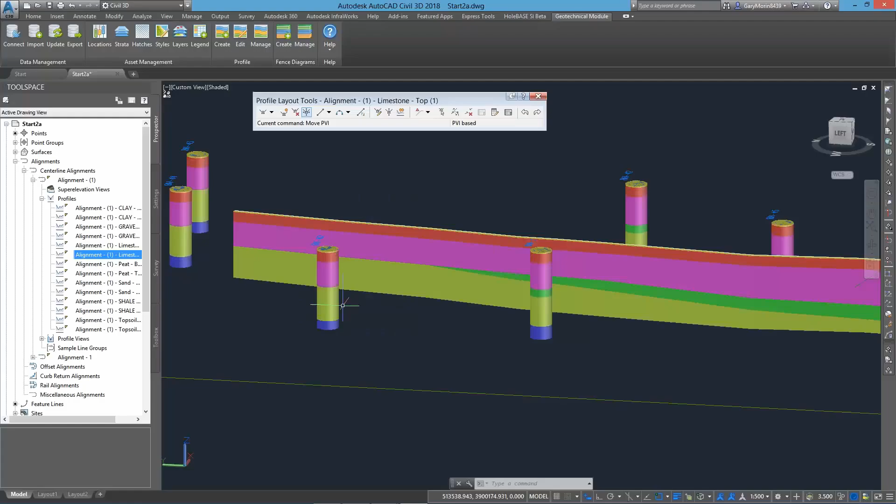Now, in InfraWorks, and Eric may well correct me when I say this, but generally speaking, when you pull these 3D objects into InfraWorks, it can use your layer color or the colors of your objects. But if there are render materials associated to it, it will use those materials to color and render them inside InfraWorks. So you just need to be aware of how you add and remove materials to the data before you bring it into InfraWorks.

Now, in the Geotechnical module, you can go to the Hatch Manager. And if we go and pick a particular material, so for every geology type we have, it will have an entry in here. So we go down, for instance, look for peat, and we pick on peat, we will see that peat is this grey colour, but it also has a material, dirt, dark brown associated to it in this particular drawing. If I go and pick another geology, let's just go down and look at clay, hit filter on that, we see that we haven't got any material set here for clay.

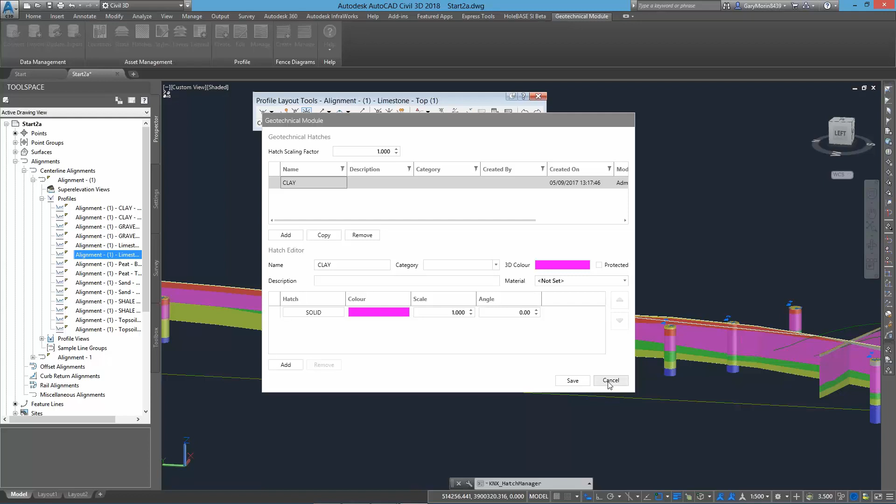Now, depending where you set the material, if you've already got the objects created and they're already in your drawing, when you change those values there, you don't always see those changes appear in here straight away. Now, what I've got here, by the way, is my shaded just to show me standard color. If I go into realistic mode, it will show me the actual rendered materials in here.

Now, what you can do, if I want to quickly apply, let's say, a material for my clay, but I don't want it to be standard for all my projects, I just want it in this one particular drawing and nowhere else, there's an old AutoCAD command called material attach, which will list you all of your civil surfaces. And if I scroll all the way down here to the base, we can see my Keynetix fence diagrams ones here, so fence peat, fence topsoil, we've got fence clay here, and if I scroll across to the right, you can see all our different materials.

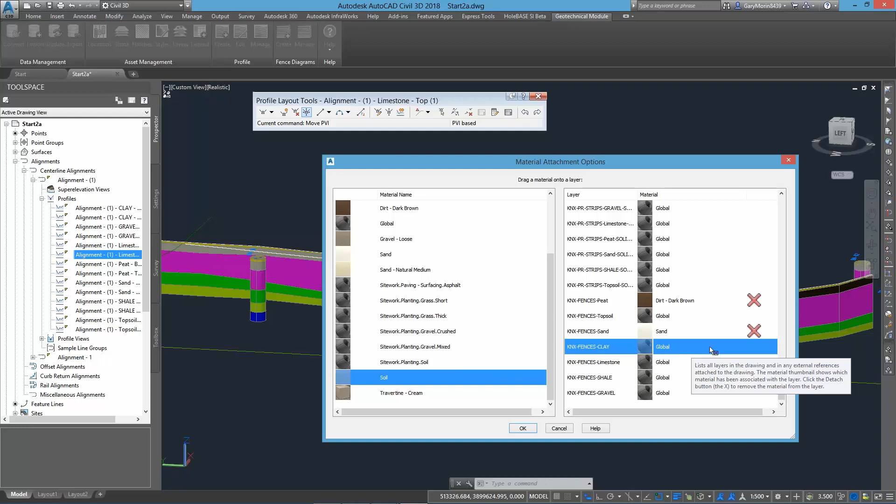So if I wanted to apply, let's say, just for the sake of it, soil to my clay, I can just literally drag that over and drop it in here, and then that will apply that material to anything in my fences clay layer. All my fences will have that material on. I'm not going to do it for now, I'll just hit cancel on there. But it's just knowing that relationship or how you add materials so you can then see those materials inside of

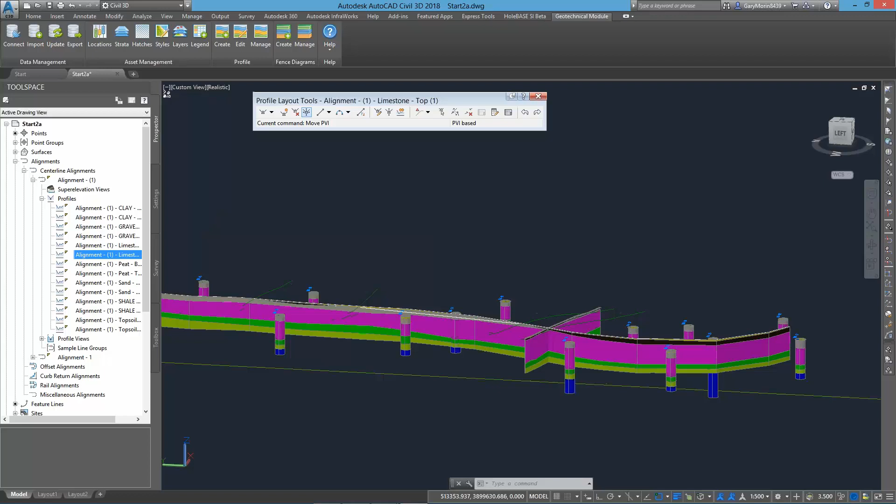InfraWorks is important. But once you've done that, you've got all your fence diagrams done, you've checked it all, you've looked at the layout of the geology and you think you've got it right, we can then use the export command here, and basically it's going to take my 3D boreholes, my fence diagrams and my plan items and put them into a new drawing. So I just come in here, type in the name of my drawing, export one or whatever, hit save, and it will save that into a nice clean drawing that has only that information in it and nothing else.

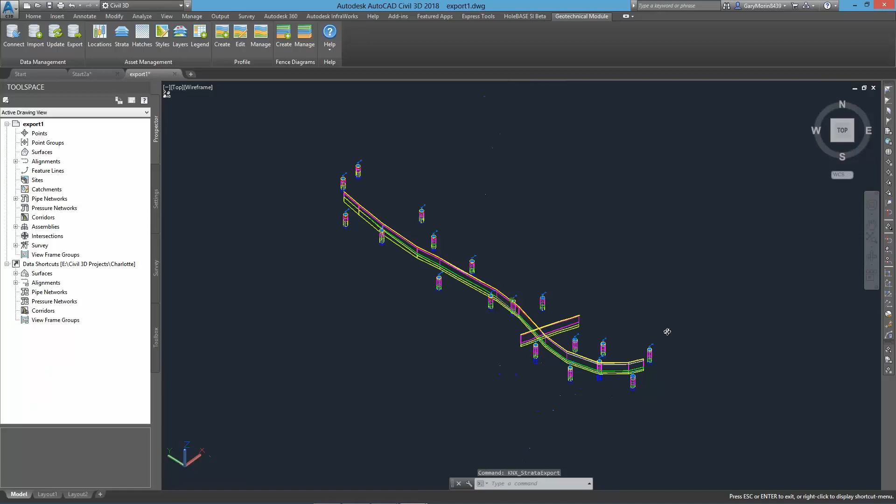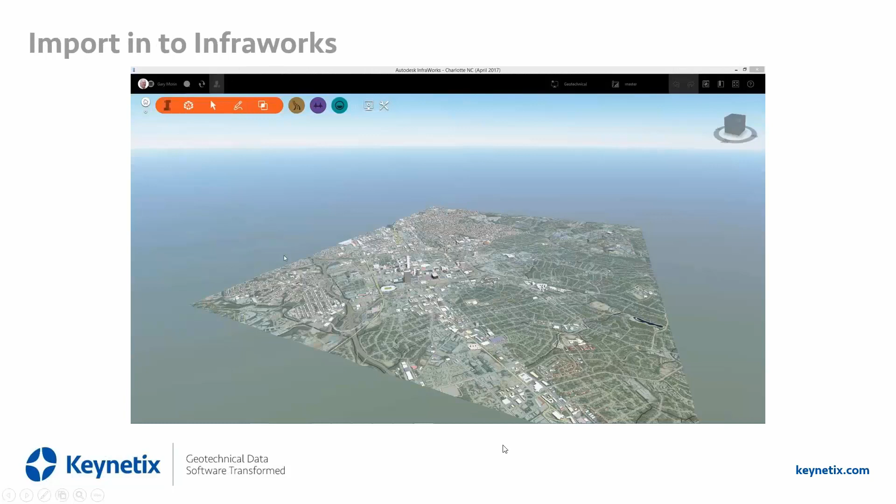Okay. So with that done, now please forgive me because my machine doesn't have enough memory, so I can't actually run InfraWorks and AutoCAD Civil all at the same time. I've only got about 8 gigs in my machine at the moment, so I pre-recorded this one. Actually, it's not so much running those two, it's running GoToMeeting and GoToWebinar at the same time that's the major problem. So here's a recording I've done just to pull this information in.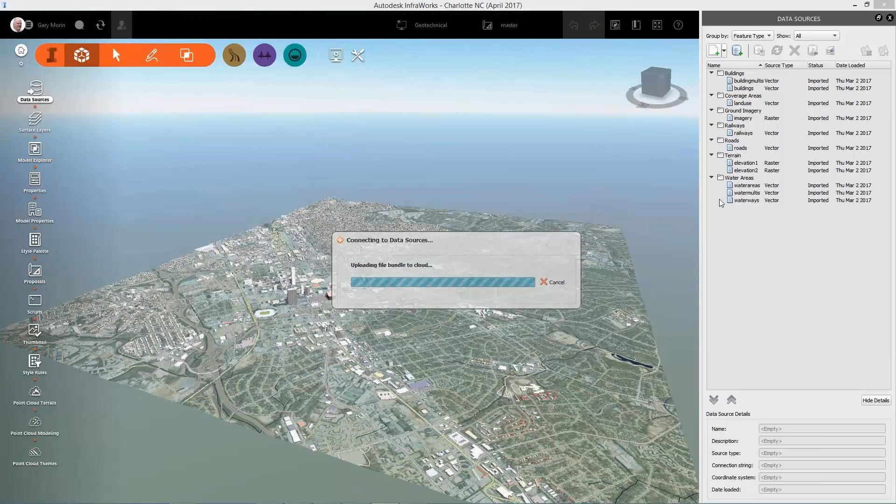So we're just going to go pick my drawing. In fact, as I've done it before, it's a slightly different drawing name. Gets uploaded. Because we've drawn this drawing, we're working in the real units of where it is in space. We just wait for it to get configured now. So what I've got to do now in this project is associate the right coordinate system for my import. So it's this one here. I've got it in here ready to go.

We've just got to allocate a feature type. So I'm just going to say it's city furniture. Doesn't really matter. Would be nice for us to get some geotechnical feature types in there at some stage. It's something we'll look at. And we'll just close and refresh. And now, when we zoom in here, you should see we've got our fence diagram being shown down here. Just doing this very, very quickly.

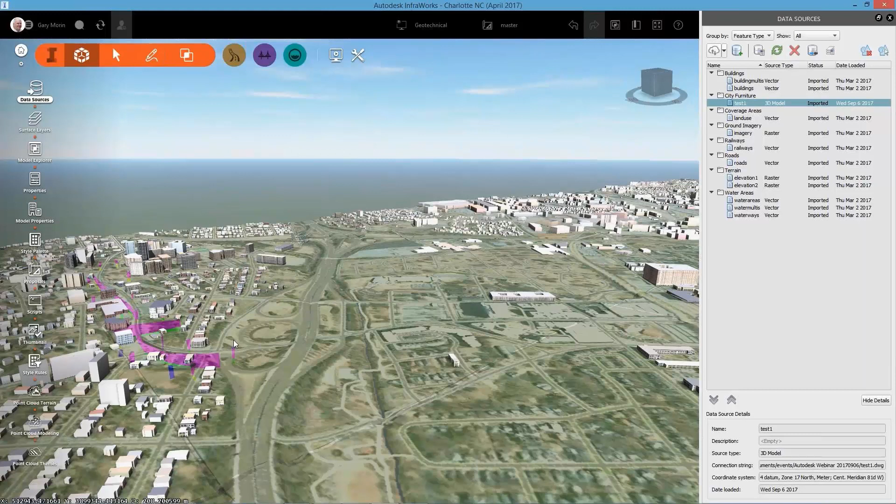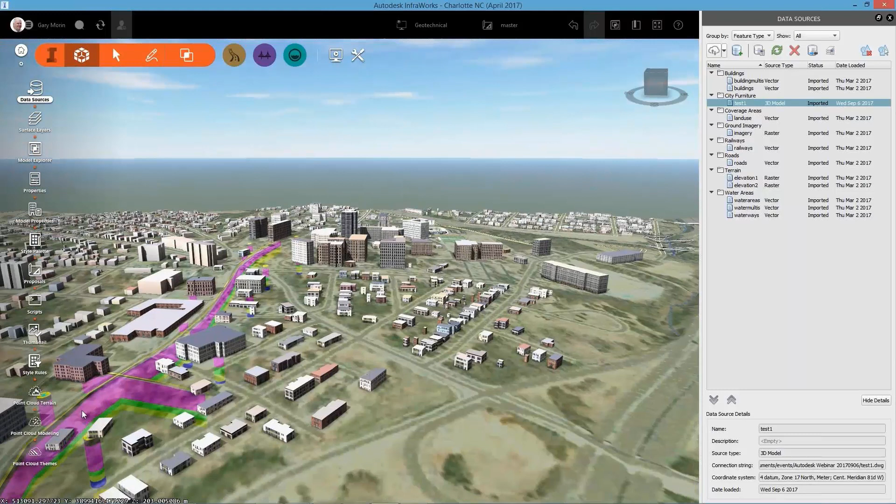In fact, I don't actually concentrate on the peat, but you can see that dark area, the rendered material, the peat being shown up as we zoom in and around the site here now. So again, it's a great way of using this to share it with the rest of the construction team, use it to talk to the client about where you're going to have problems, where you need to do different engineering because you found different materials down there, etc. So that's showing us how to import it in there. We're just about done now.

There was just one thing I mentioned earlier on, a potential third method for editing. So at the moment we're seeing the full 3D modeling in 3D. We've seen how we can edit the 2D. What we wanted to do at Keynetix is see whether we could combine the two somehow. And so as Dave mentioned, we do a whole range of products for managing geotechnical data.

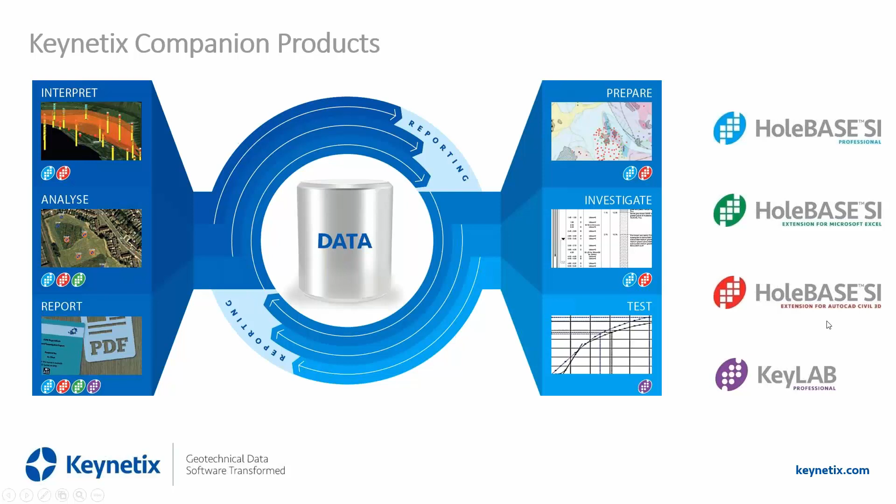These are HoleBASE products that are compatible with the Geotechnical Module. We also have a big brother to the Geotechnical Module called the HoleBASE extension for AutoCAD Civil 3D. So what I'm going to show you now is basically a pre-release version that we're working on. We hope to get released later this year some functionality that really is going to help generating fence diagrams and make it much, much quicker.

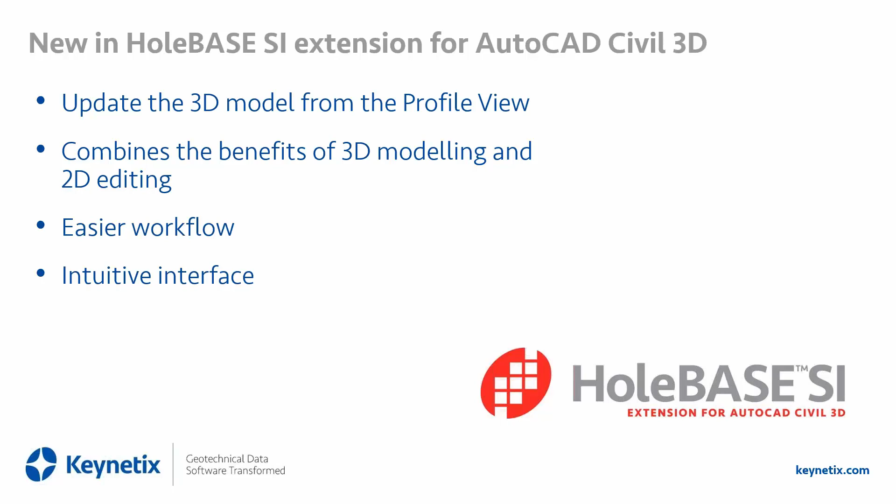So basically what we want to do is allow you to update the 3D model from editing the profile view. So basically we're trying to combine the benefits of full 3D modeling, but with you working in 2D, or looking at it in 2D, I should say. We believe it's easier workflows. We're trying to make the interface as intuitive, as easy as possible to work with. And we're hoping to get this released later this year.

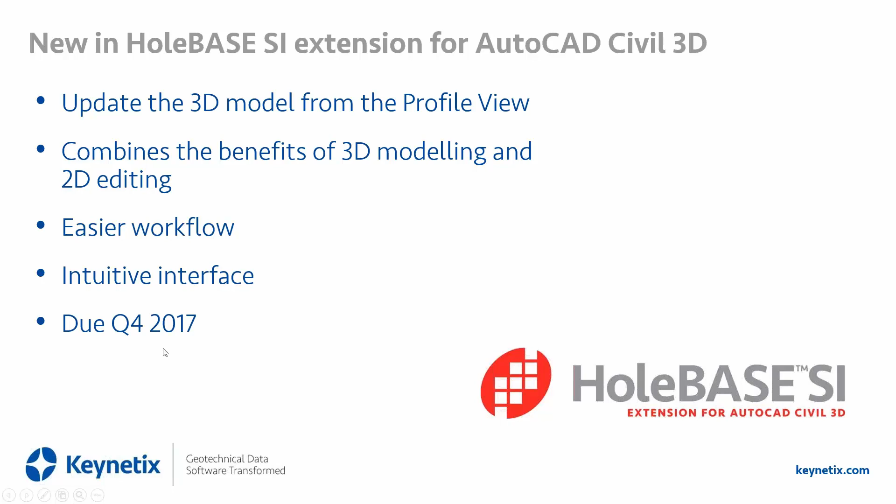This is a normal calendar, not the Autodesk calendar. This is the real world calendar that we're looking at here date-wise.

So as this is pre-release, I'm not going to risk trying to do it live to you. So let's go in here. So this is the HoleBASE SI beta. You can see it's the same project data we've just been looking at. And I'm going to go over to this area here, which is sort of create and edit section. So the idea is we want you to be able to create profile views, or in this case, we just call them sections, as quick as possible.

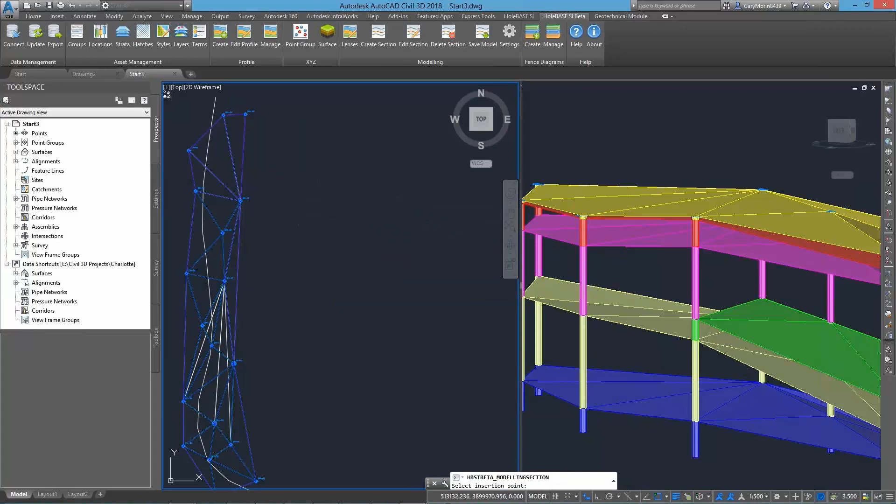So we just literally either pick on an existing alignment, job done, or you could just draw a new alignment and pop it in really quickly. So in comes that same data as you were looking at. I'm just going to concentrate on this end for now. So we now have this edit section command. If I click on that profile view, it makes this profile view editable for me. And you can see it color codes it, and you've got this little interface here now where we specify which type of geology we want to model.

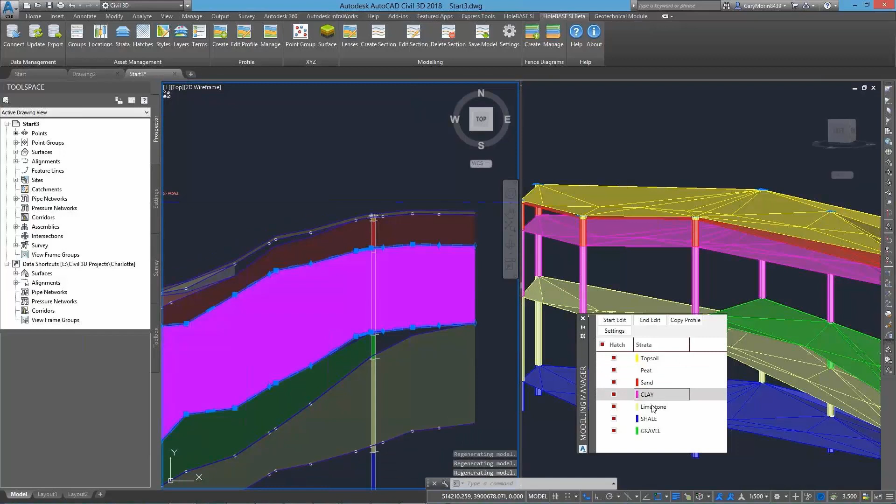And you notice it's emphasizing, it's making it much clearer what it is we want to look at and work with. So let's just go back to our topsoil here. Now, you need to keep your eye on both sides of the screen at the same time here. So as we drag this geology up here, if you look on the right-hand side over here, can you see the 3D surface is editing and changing at the same time?

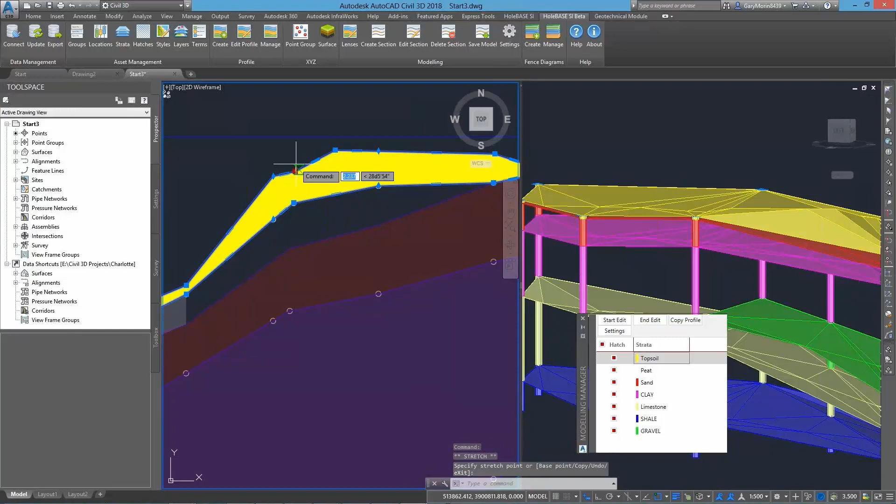So by literally just dragging the dots around how you want it to look and feel, we can actually update and modify the 3D model at the same time. So we're working in our 2D profile view, but updating the full 3D model as we go along. I hope you see that this is generally speaking a much easier workflow. It's easier to understand what's going on. We've still got a bit more work to go to finish it all off, but it should be ready later on.

So there, for instance, I've just ended that editing session. If I go now and just create myself a quick fence diagram, just pick that profile again with the profile view we have there. In it comes. Let's go through to our Strata manager. I'm just going to turn off some of these different strata so we can see the fence diagram a little bit better in there. Okay, I'm just showing the sand at the moment.

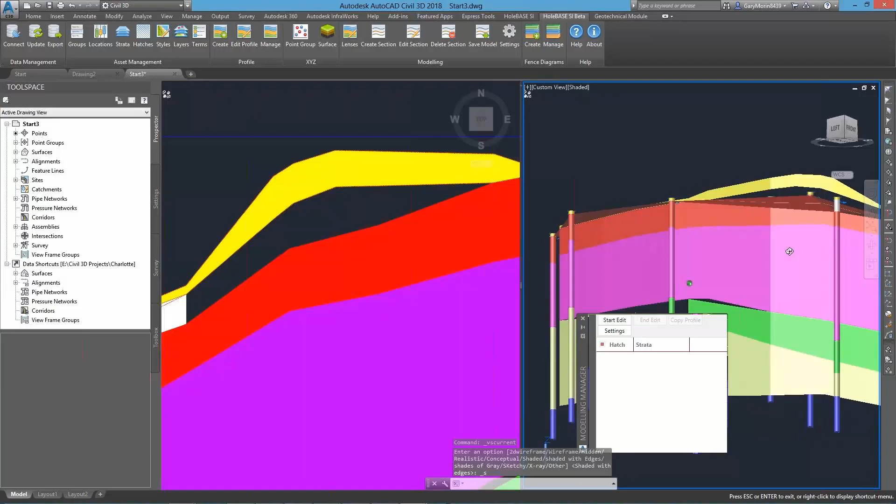So you can see where we raised the topsoil. You see it being shown in the fence diagram there. And we've got that little hole below the topsoil and the sand. So we just need to correct that now.

So let's go back into the HoleBASE beta, click on our edit section command again, pick the profile view we want to edit, and first of all do a little bit of cleaning up with the peat down here. So you can see all I'm doing is just picking these lines, dragging them around to where I think they should go. So we'll just tidy this up a little bit more. There we go.

Okay, so here I want to now flick over to our sand and just pull the sand up so it meets those top edges, like so.

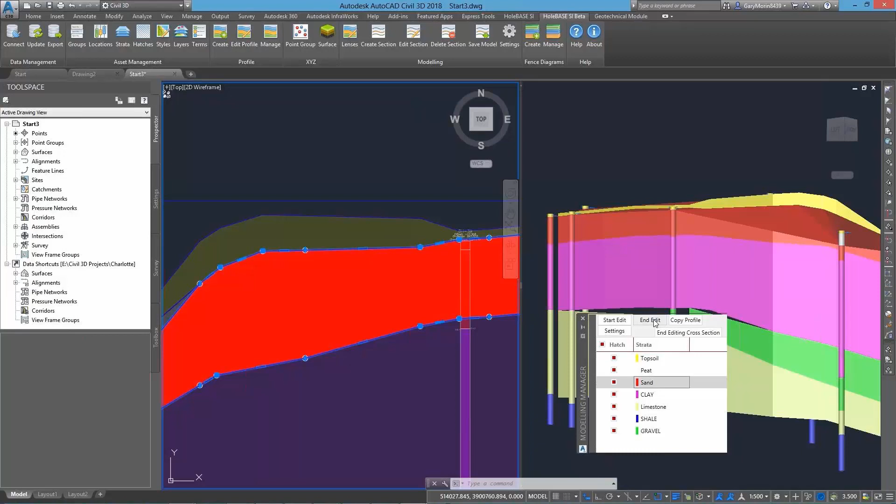So really what you're doing is just concentrating and looking at what you think that geology should look like now. So again, if we come back in here, let's rebuild our thing. You can see our fence diagram. You can actually see our surface there going up to that top edge. Let me just turn off that sand as well so we can see a little bit clearer what we're looking at. And there we go with our fence diagram all being updated.

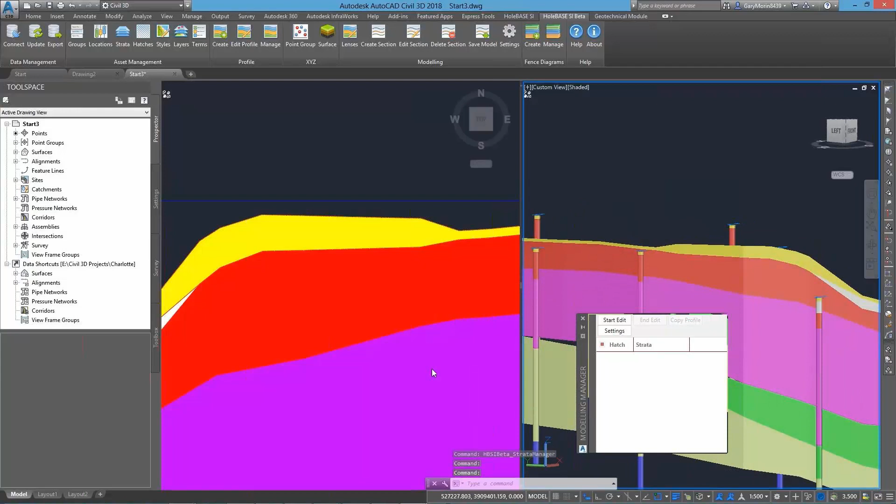Now the benefit of this, of course, is that the 3D surface is all updated, so it is still dynamic, so we can change that profile view, move things around, and we can still generate new profiles, new sections from it very quickly by working that way. So that's it, just about done for now.